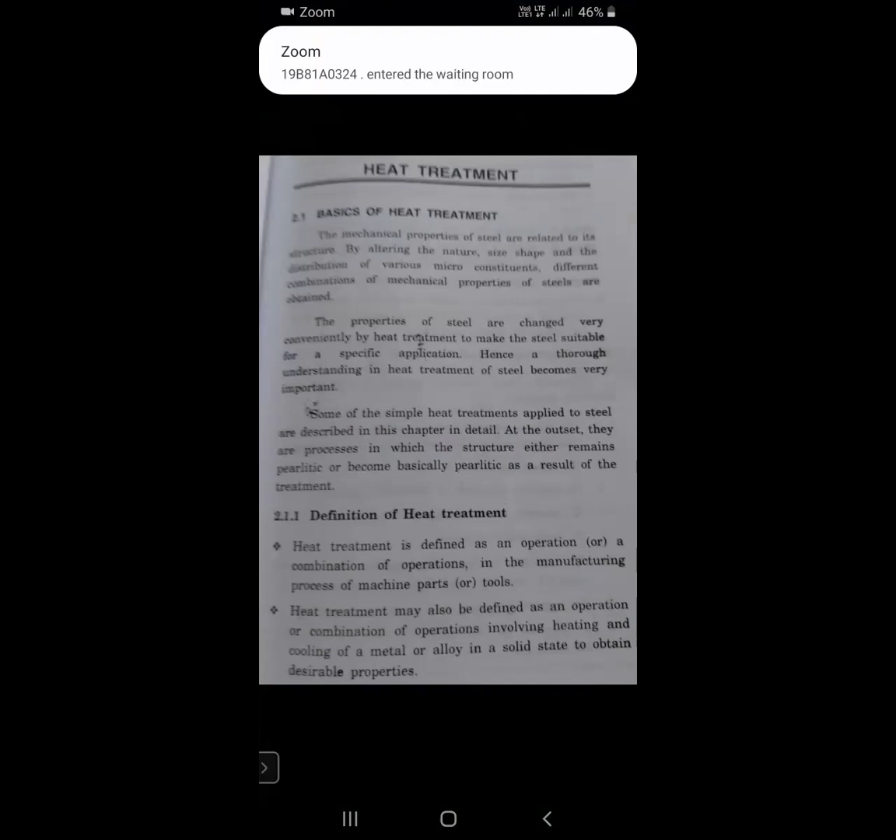Heat treatment. The basics of heat treatment. The mechanical properties of steel are related to its structure. By altering the nature, size, shape, and distribution of various microconstituents, different combinations of mechanical properties of steels are obtained. The properties of steels are changed very conveniently by heat treatment, to make the steel suitable for a specific application.

This is a very important point. Why do you conduct a heat treatment process? Because the properties of steels are changed by doing heat treatment. Properties of steels are changed very conveniently by heat treatment to make the steel suitable for a specific application.

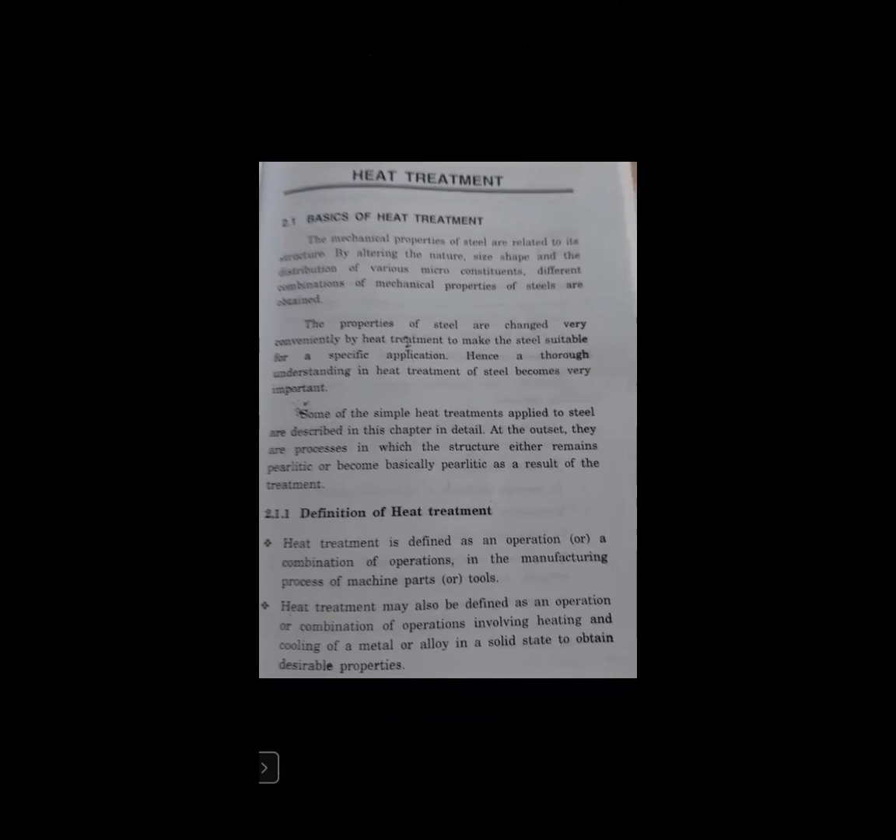As different applications are there, we use different steels. Heat treatment process is very important, particularly for steels, to change the properties for a particular application, a specific application. Hence, understanding heat treatment of steel becomes very important. Some of the simple heat treatments applied to steel are described in this chapter.

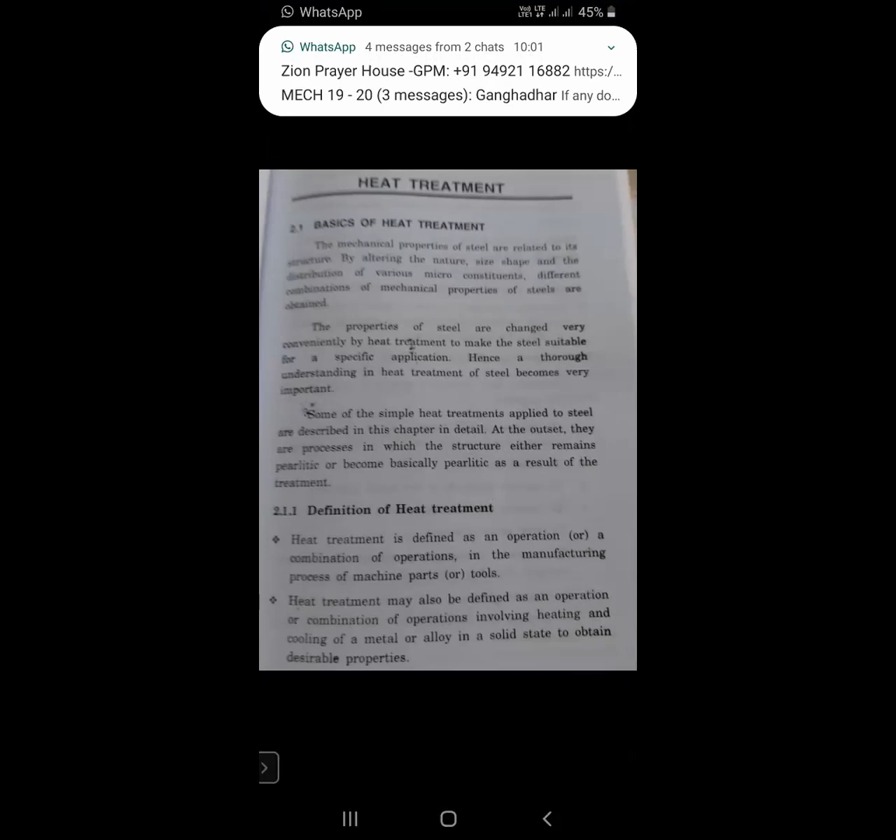Here is the definition of heat treatment. Let us discuss. Heat treatment is defined as an operation or a combination of operations in the manufacturing process of machine parts or tools.

Another definition: heat treatment may also be defined as an operation or combination of operations involving heating and cooling of a metal or alloy in a solid state to obtain desirable properties. By doing the heat treatment process, we change the properties for our specific application. That is the main heat treatment process.

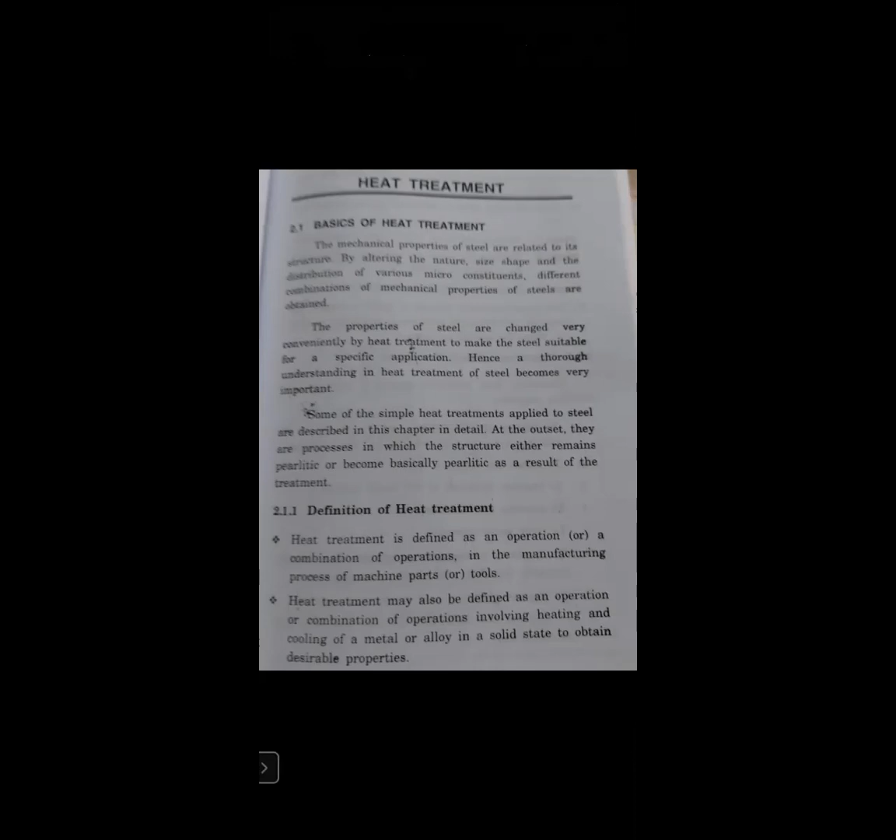Are you able to understand? Heat treatment may be defined as an operation, or a combination of operations, involving heating and cooling of a metal or an alloy in a solid state, to obtain desirable properties.

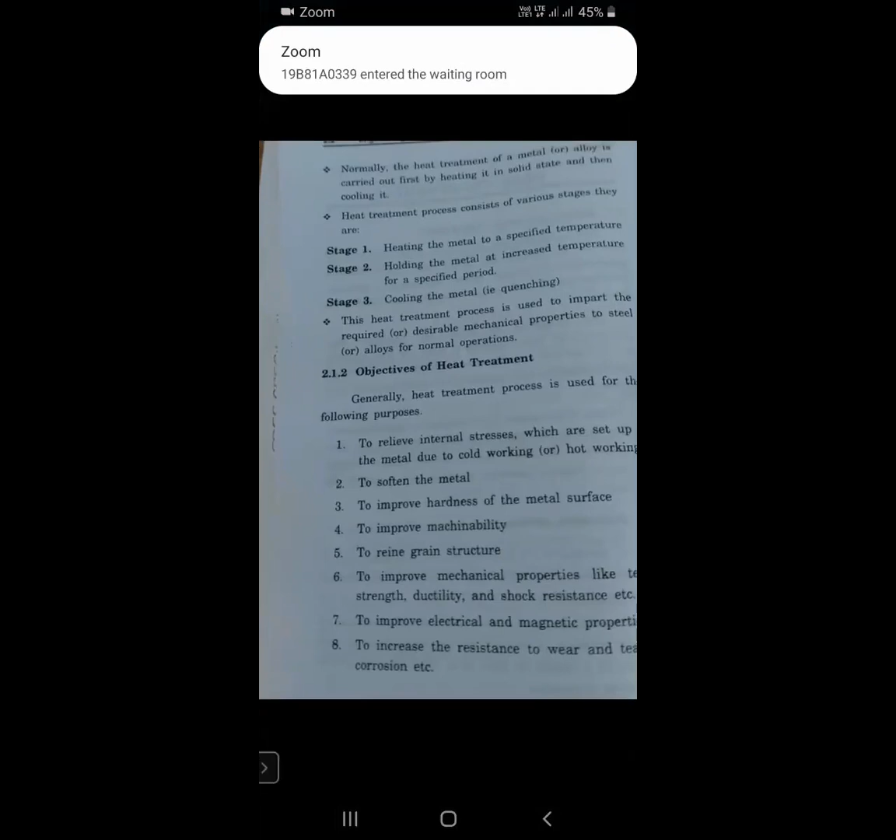This is the heat treatment process. Next is the purpose of heat treatment. See the heat treatment stages. In heat treatment, particularly three stages are there. A heat treatment process consists of various stages.

Suppose you take any steel bar or steel rod, any material that is steel - we are discussing heat treatment of steels only now. The first step in heat treatment is heating the metal to a specific temperature. We have to do this first.

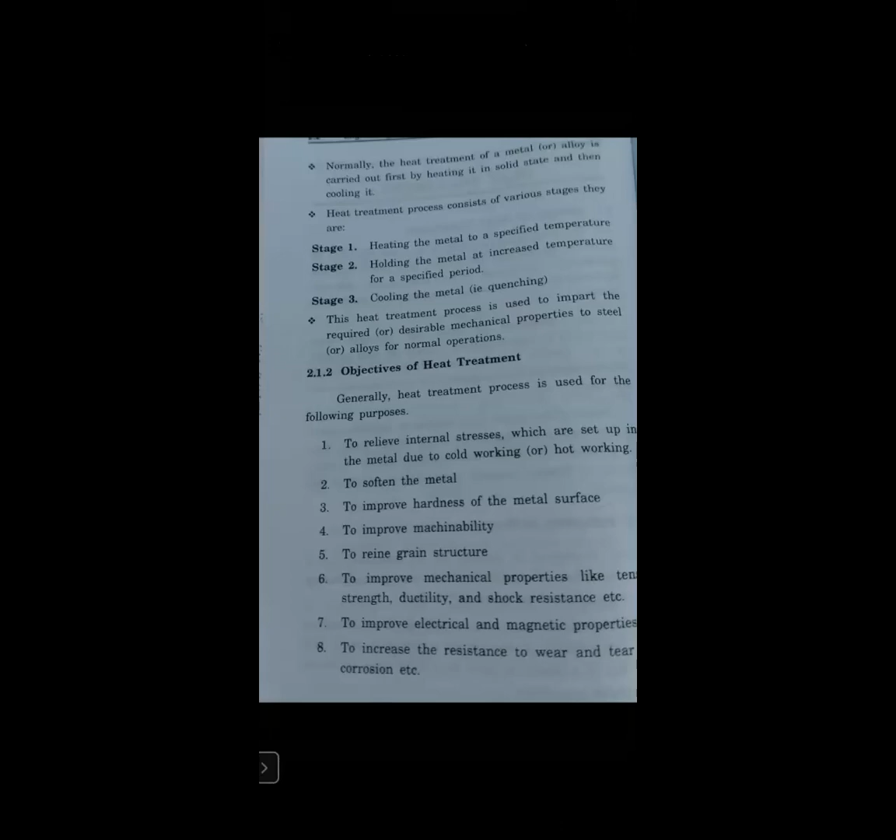That is the first step in heat treatment. Next one is soaking. Soaking means holding the metal at the increased temperature for a specified period of time. Then what do you do after heating? Don't do cooling immediately. We just have to place the material at that temperature for a specified period.

Different processes have different specified times. We have to keep the material at the temperature for some time, for quite some time. Next, the third step is cooling the metal. Just after soaking, the next step is cooling the material.

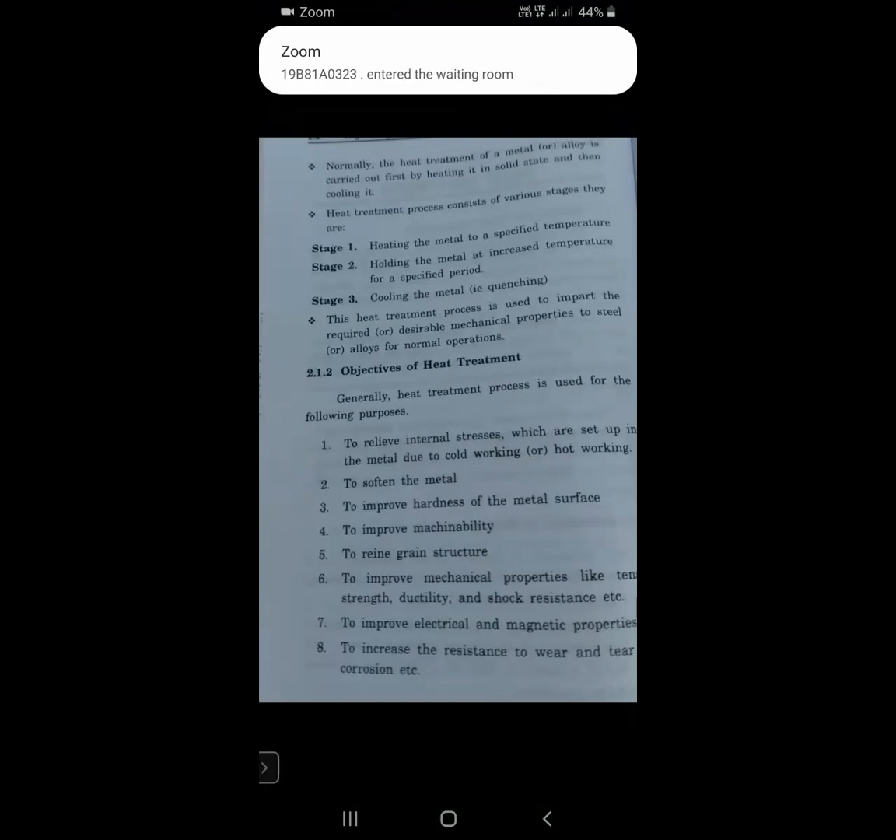Hey, 65. Who is 65? Hello. Hey, this is not good practice. Mute your cell phones, please.

The third step is cooling. The heat treatment process is used to impart the required or desirable mechanical properties to steel alloys for normal operations. Next, what are the main properties or objectives of the heat treatment process - that is, the objectives.

Is it visible? Hello. Yes, sir.

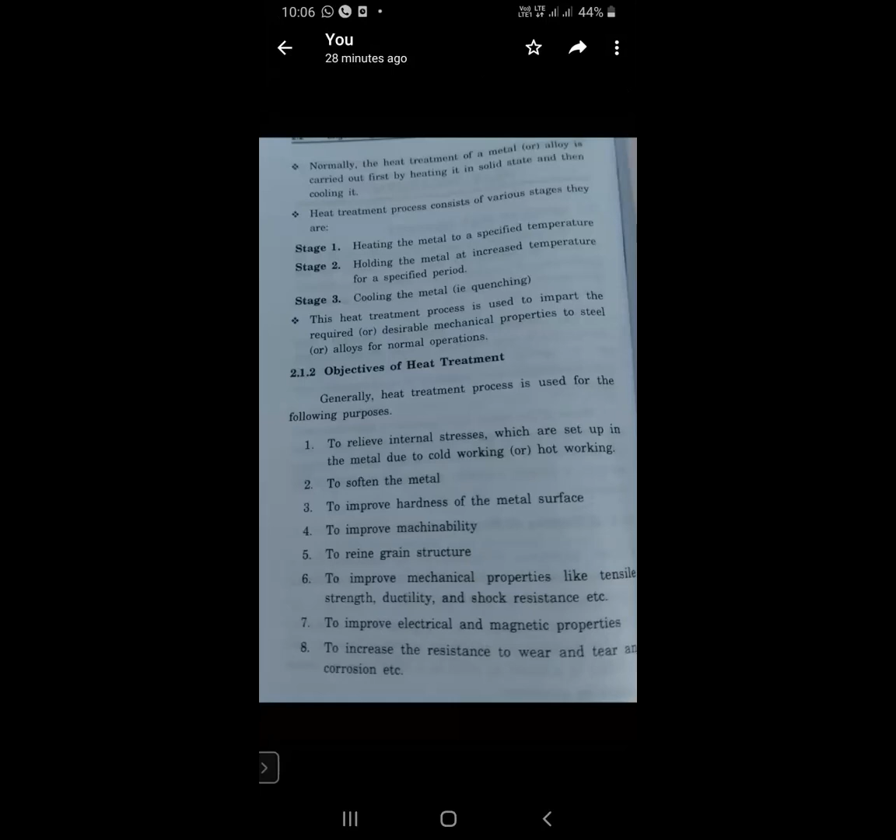What are the objectives of heat treatment? First is to relieve internal stresses, which are set up in the metal due to cold working or hot working, particularly in steels. After processing there are some internal stresses developed by cold working and hot working. First of all, we have to relieve the internal stresses by the heat treatment process.

Second objective is to soften the material. Materials have different properties, and a few materials are very hard. By doing heat treatment, we soften the metal layer or material.

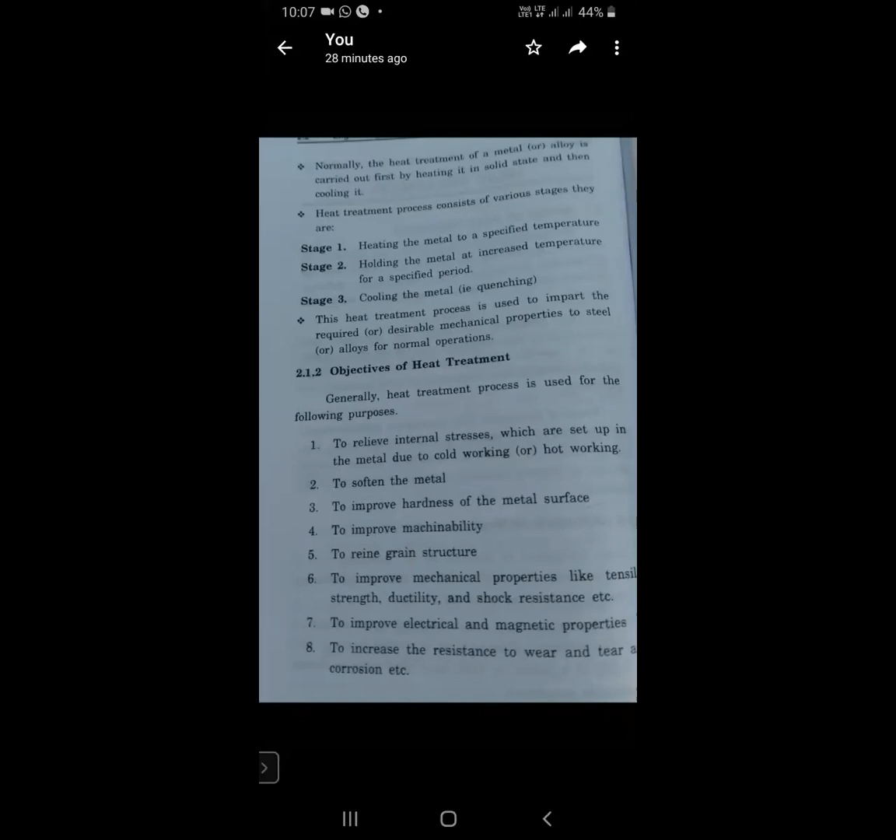Third objective is to improve the hardness of a metal surface. To improve hardness, as all of you know, is a mechanical property. The material must have hardness, otherwise it will be easily broken. That's why we improve the hardness of the metal surface.

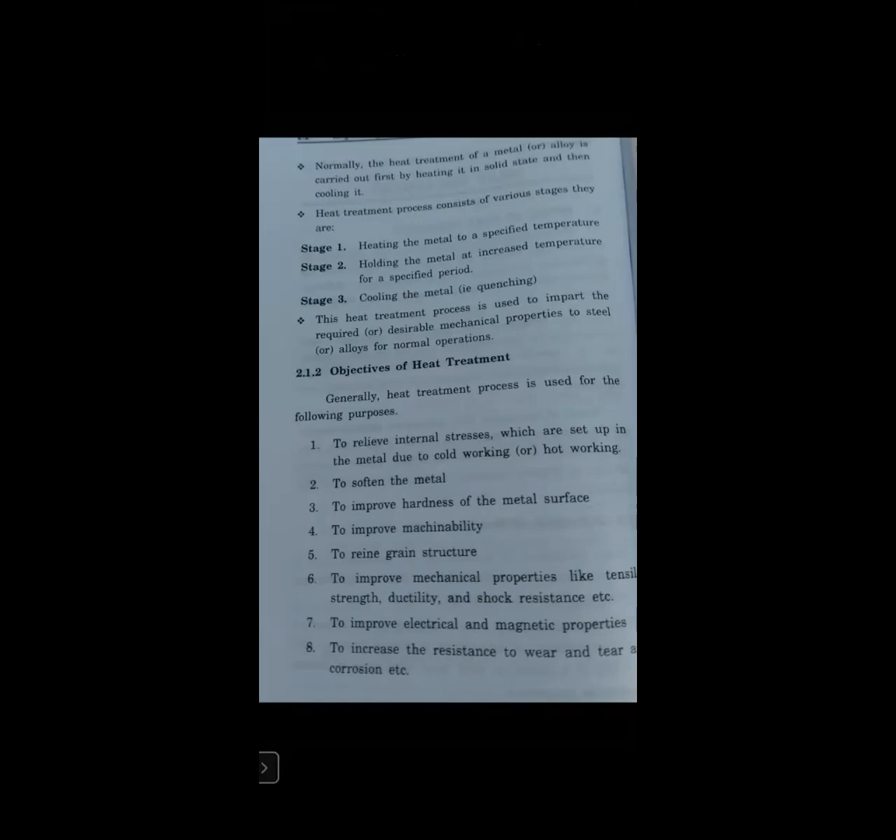Next objective is to improve the machinability. What is machinability? Suppose you want to convert steel into any product or shape, then we have to apply machining operations. That's why we improve machinability, particularly by doing a heat treatment process.

Another important objective is to refine the grain size. Different grains are there, as I already discussed in the first unit - coarse grains and fine grains. By doing heat treatment, we refine and change the grain structure. That is another objective.

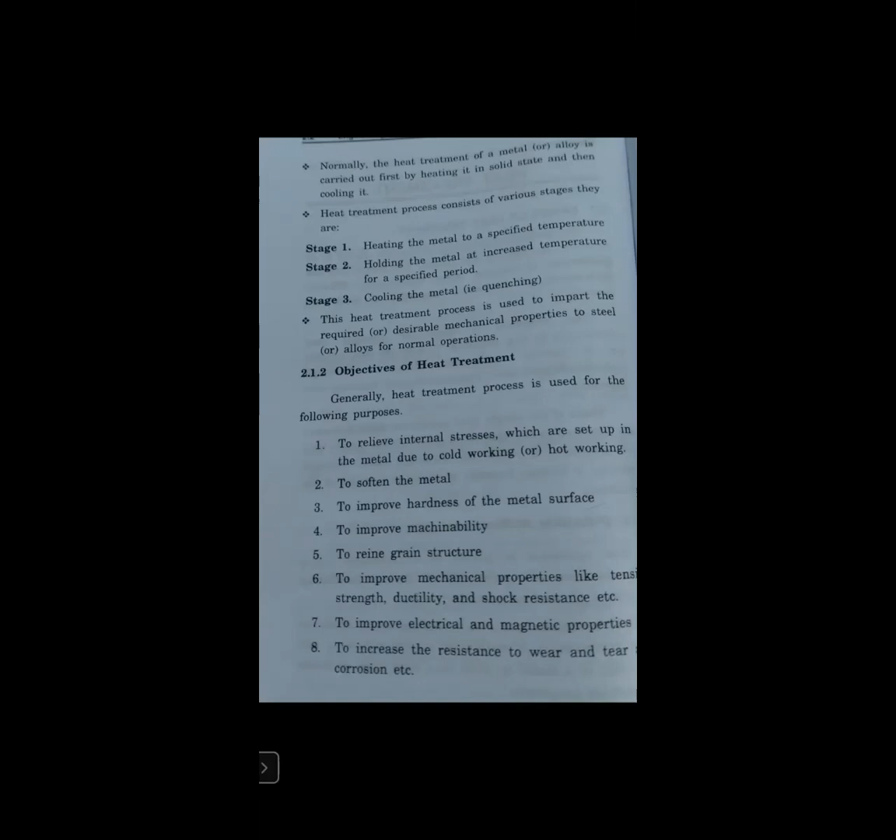Sixth objective is to improve the mechanical properties like tensile strength, ductility, and shock resistance. These are very important mechanical properties, as discussed in strength of materials - tensile strength, ductility, and shock resistance can all be improved.

Next is to improve the electrical and magnetic properties, which are also very important for steel alloys. Electrical and magnetic properties can be improved by doing heat treatment process.

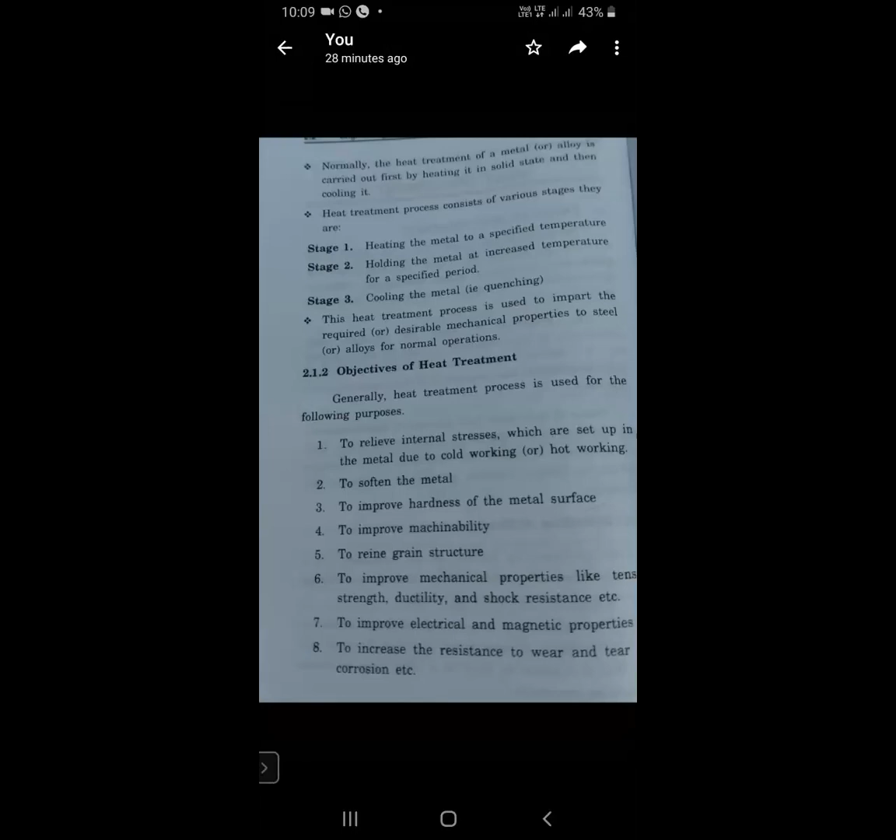Next is to increase the resistance to wear and tear and corrosion. This is very important - materials undergo wear and tear and corrosion. By doing this heat treatment process, we increase the resistance to wear and tear and corrosion. These are very important objectives.

These are very important objectives. So first, what have we covered: first is what is heat treatment, second is the stages of heat treatment, third is the objectives of heat treatment.

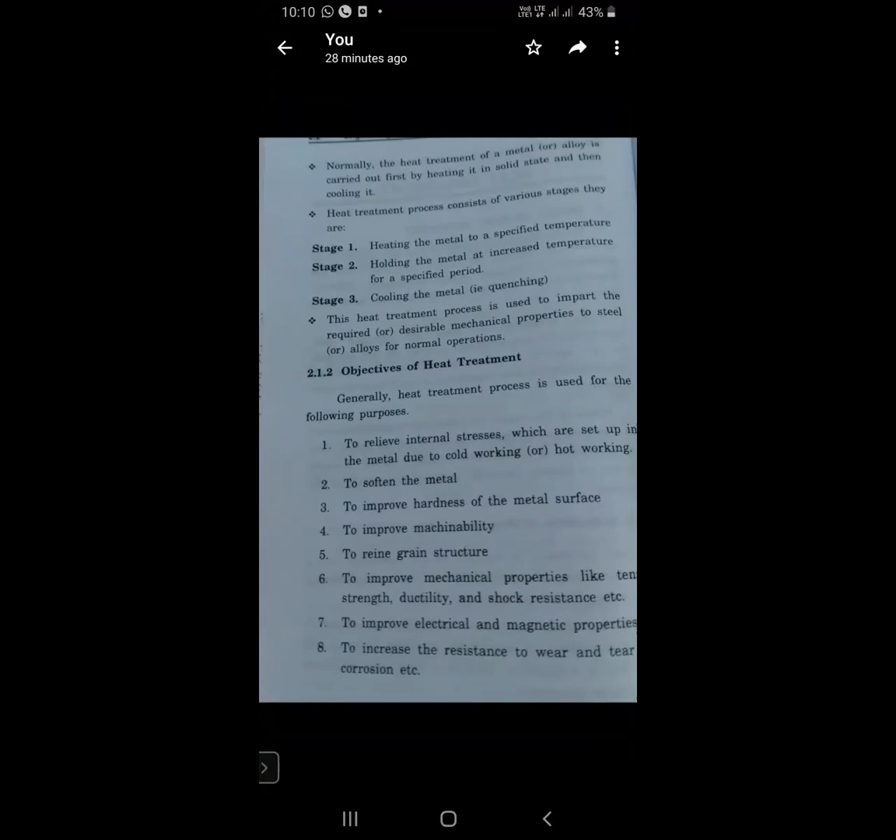Hello, hello, Babu. Yes, sir. Yes, sir. Okay, now what have you discussed so far?

First is the definition of heat treatment. Second is the stages of heat treatment. Third is the objectives of heat treatment. Next is the types of heat treatment processes.

You may ask, sir, you are telling heat treatment objectives, properties and definitions - sir, what are the types of heat treatment process? Yes, so many types of heat treatment processes are there. The important ones - first is the annealing process.

Annealing process is very, very important. Next is normalizing. So all of you understand: first is annealing, second is normalizing, third is hardening, fourth is tempering.

The fifth and sixth are austempering and martempering, but we will not discuss those in our syllabus, only up to four. Next, the seventh is case hardening.

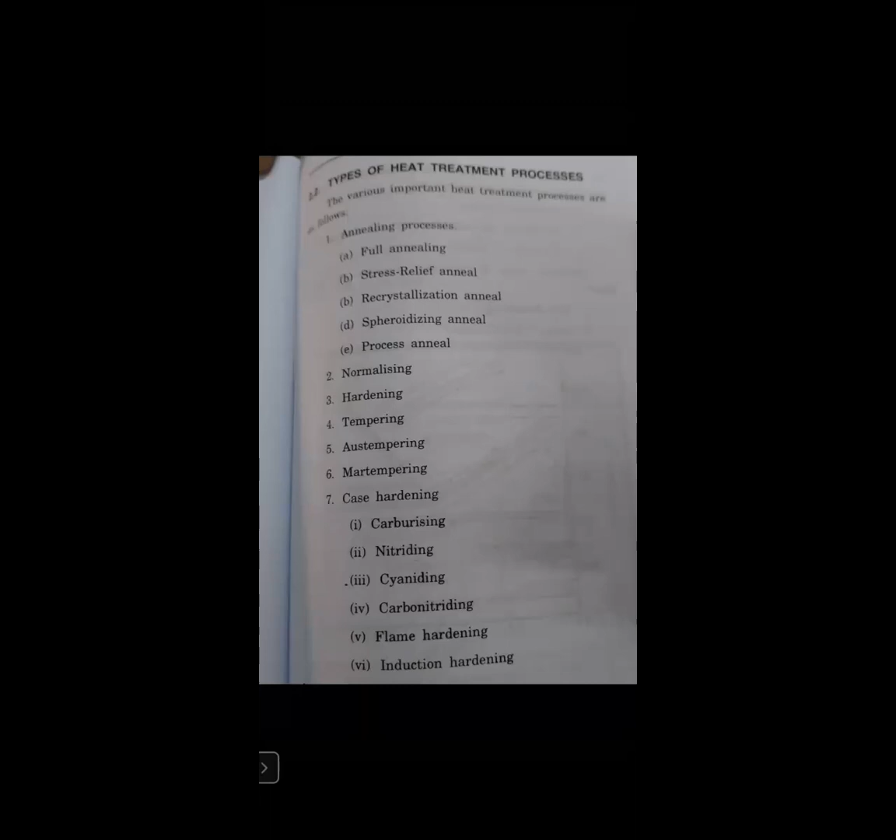Particularly for annealing, we can classify it into five types: first is full annealing, second is stress relief annealing, next is recrystallization annealing, fourth is spheroidizing annealing, and fifth is process annealing. So the annealing process can be classified into these five different types.

Now that covers the heat treatment processes. Let us discuss them one by one, and all of you try to understand each process.

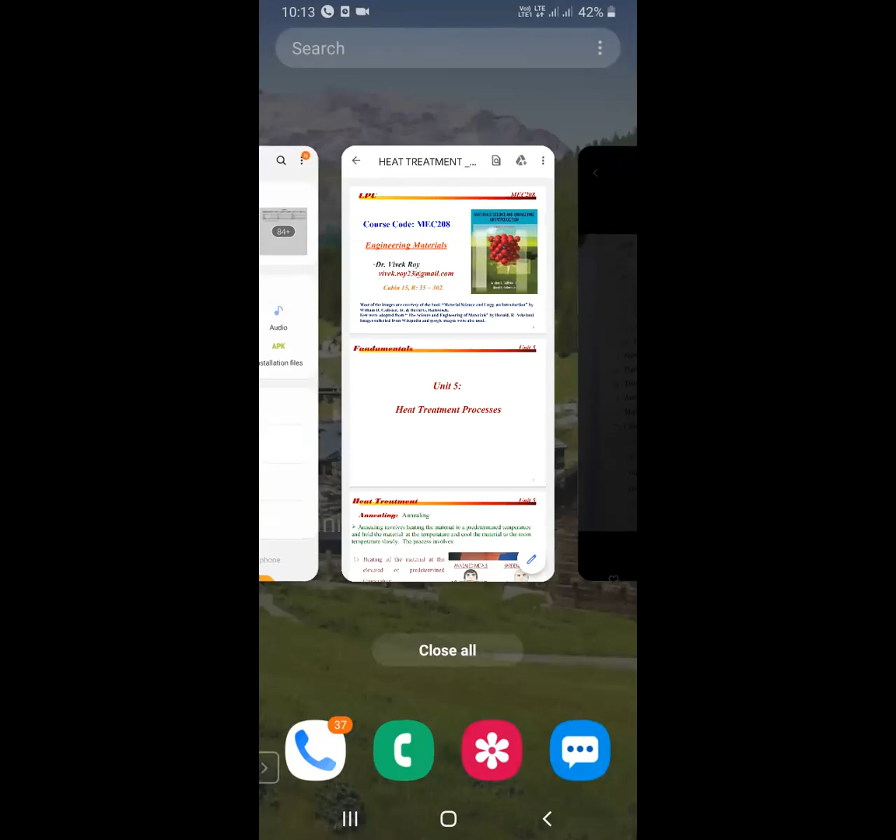See, first one is which process? First, annealing, one sir. Yes, annealing. What is annealing?

Okay, let us discuss annealing. Annealing involves, same as heat treatment definition, heating the material to a predetermined temperature. First we have to heat it, at one temperature that is predetermined. That means we will determine the temperature for the process.

Now suppose the annealing process having some definite temperature, and holding the material at that temperature. Second stage is holding the material at that temperature, and cool the material to room temperature slowly. Yes, this is the meaning of annealing. Okay, all of you understand this one?

Okay first, what will you do? First, annealing involves heating the material to a predetermined temperature. How much the temperature? Then I will show you. Next, second one is hold the material at the temperature for quite some time. Next one is cool the material to room temperature slowly.

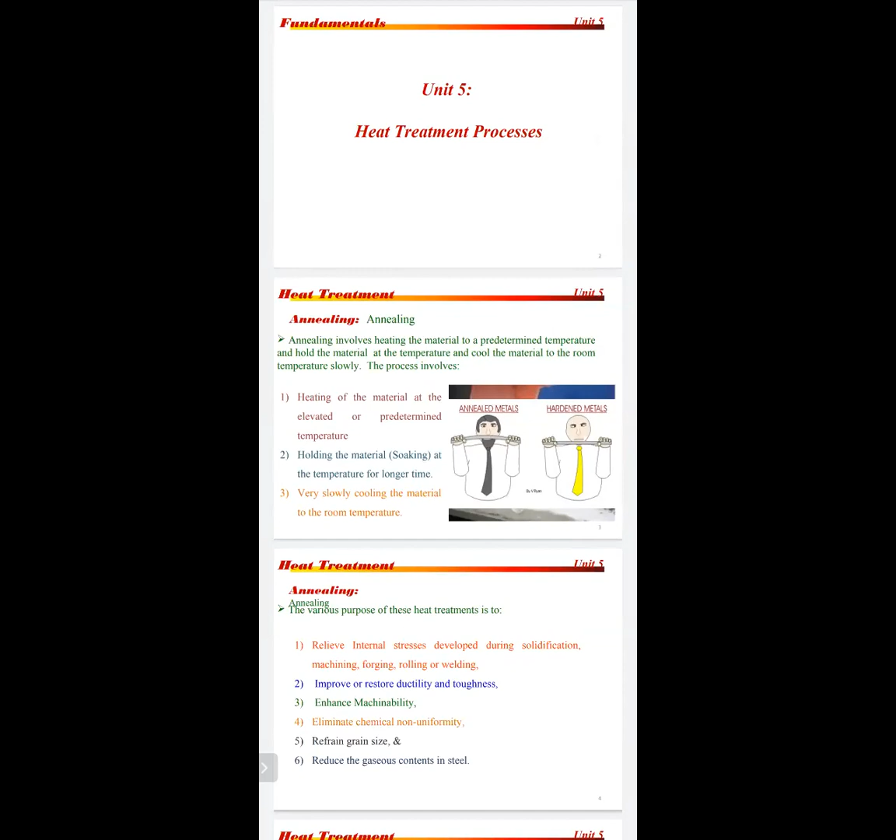Next one is the process involves here. See, three steps above I explained. First one is heating the material at that elevated or predetermined temperature. Next one is holding the material, meaning soaking at the temperature for a longer time. Next, third one is very slow cooling the material to room temperature.

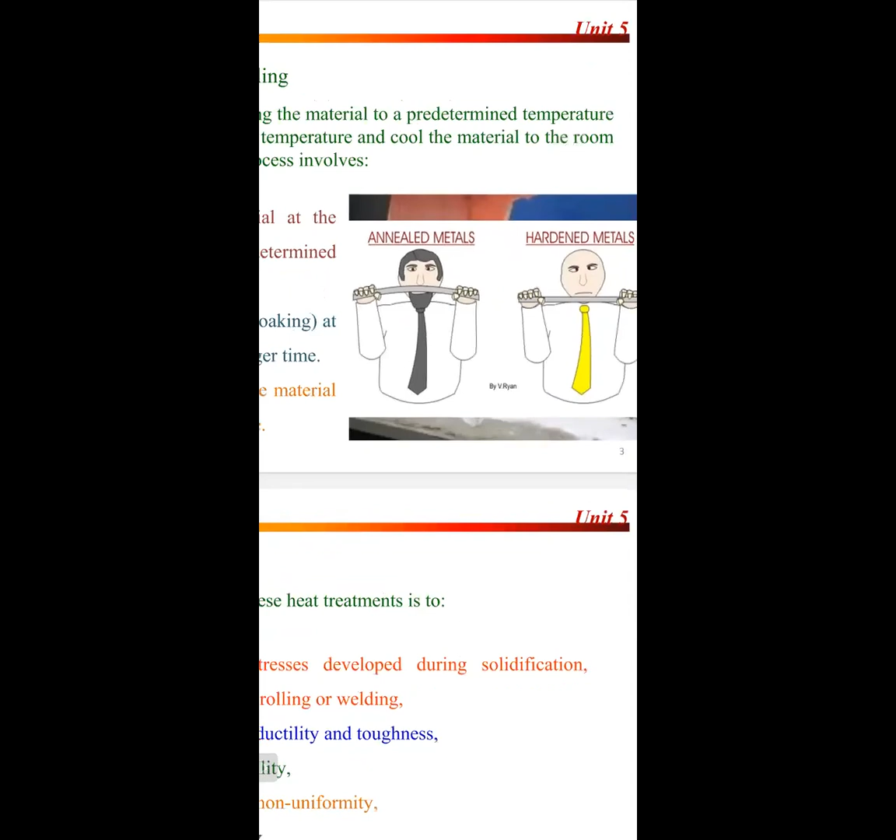See here, annealed metals and hardened metals, two persons, hold the two rods. First one is the annealed material, we can see it bends to any shape. Hardened material is very difficult. Now see, annealed materials have the property of ductility. Okay, all of you understand this one?

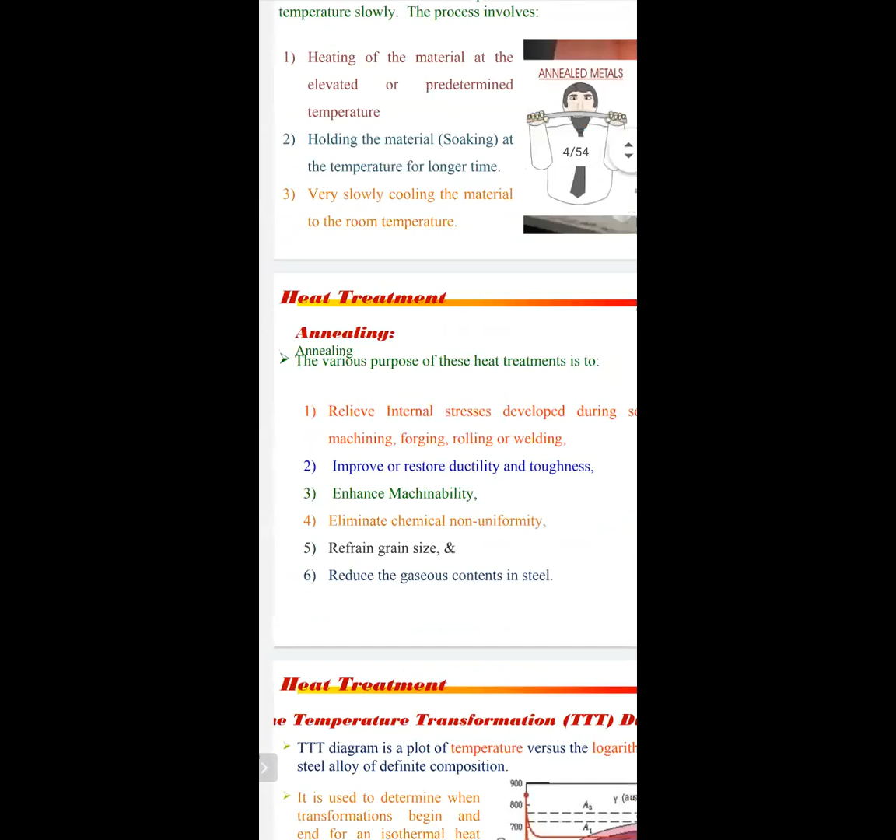Okay, now see here, the purpose of the annealing process. Already we have discussed that it is to relieve the internal stresses developed during solidification. Obviously during solidification, definitely there will be some internal stresses developed. Now how can you relieve that internal stress? That is by doing the annealing process, that means heat treatment process.

Okay, here machining, forging, rolling or welding, those are the processes there. Next, second one is to improve or restore ductility and toughness. Yes, this is very important. All of you understand what property you have to improve here, that is the ductility, to improve the ductility and the toughness.

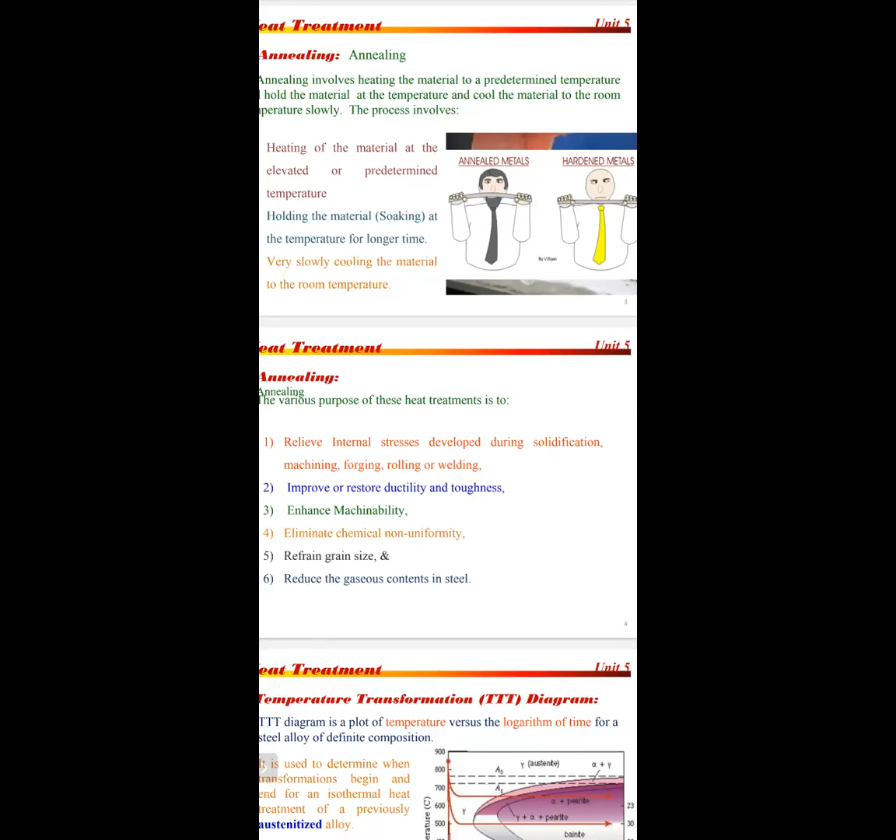Ductility means, already discussed in the previous class, that we can convert the material into wires. That is the ductility property. Or toughness means the ability to resist shock loads. That is toughness.

See here, third property is enhanced machinability. I hope you may know the machinability property. Machinability means the ability to do the machining process. Now that is also improved in this annealing process.

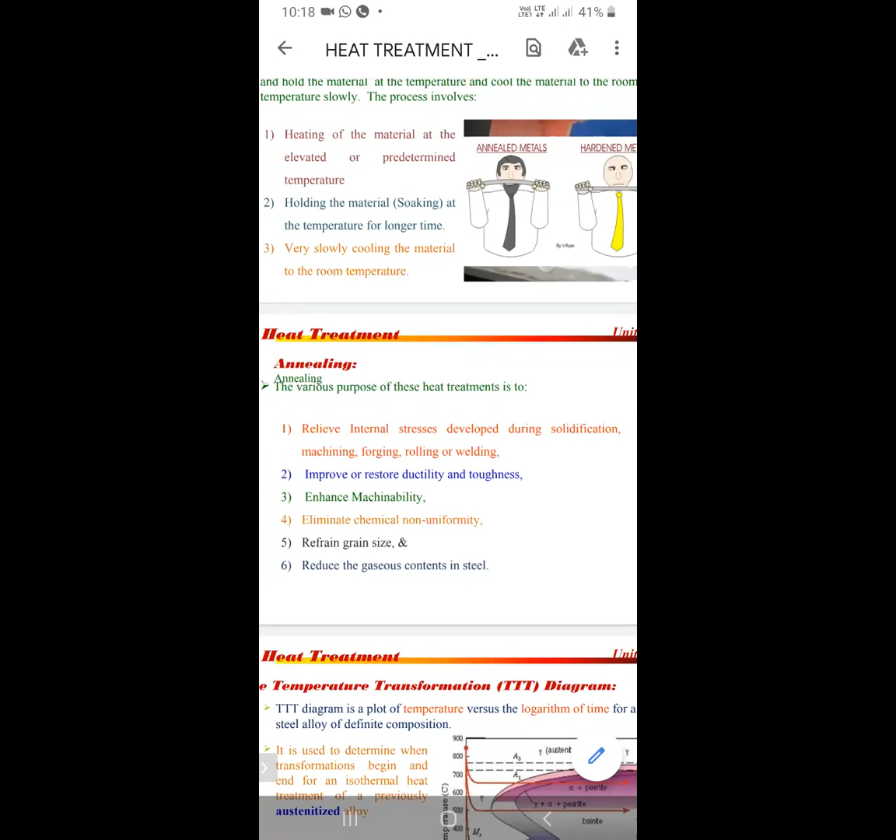Enhanced machinability. Next one is eliminate chemical non-uniformity. There is some non-uniformity during the solidification process, that can also be eliminated. Here, fifth one is refine the grain size. Refine, that is to change the grain structure. Now that is for steels, to improve the refined, that means to change the grain size.

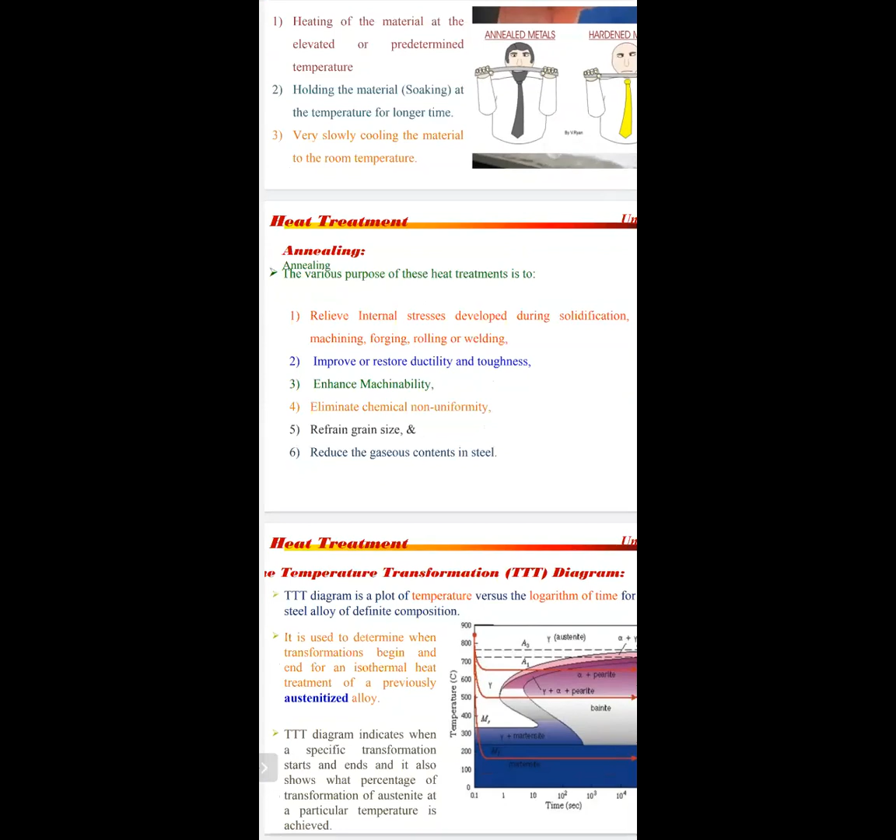Next, sixth one is reduce the gaseous contents in steel. That is the purpose of annealing, annealing process purpose. Okay, I hope all of you understood the annealing process purpose.

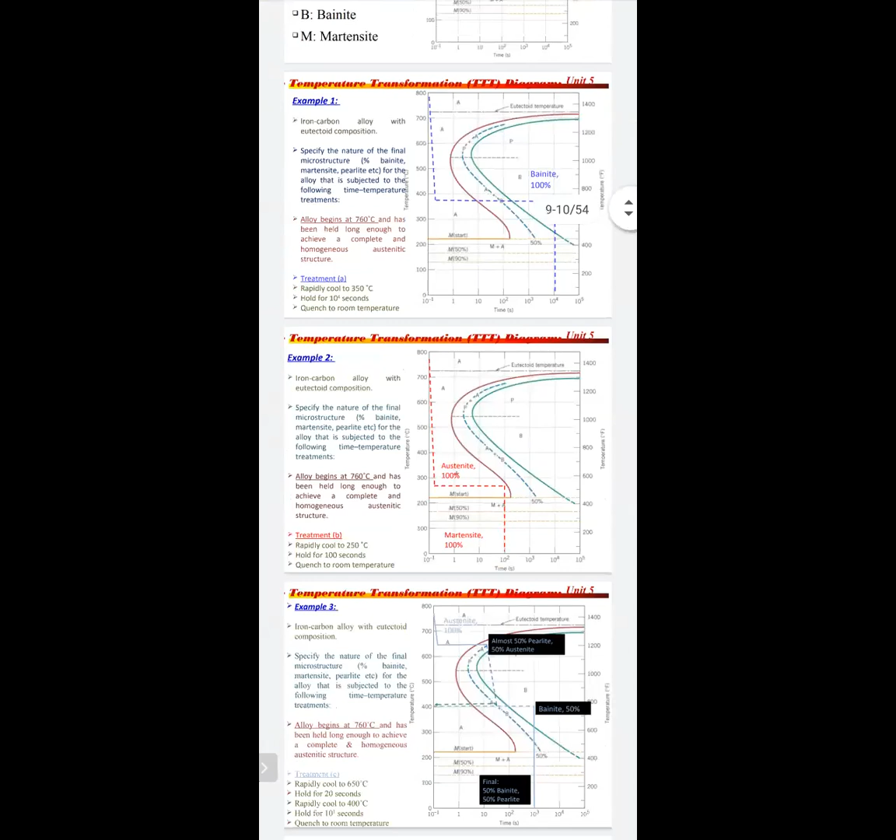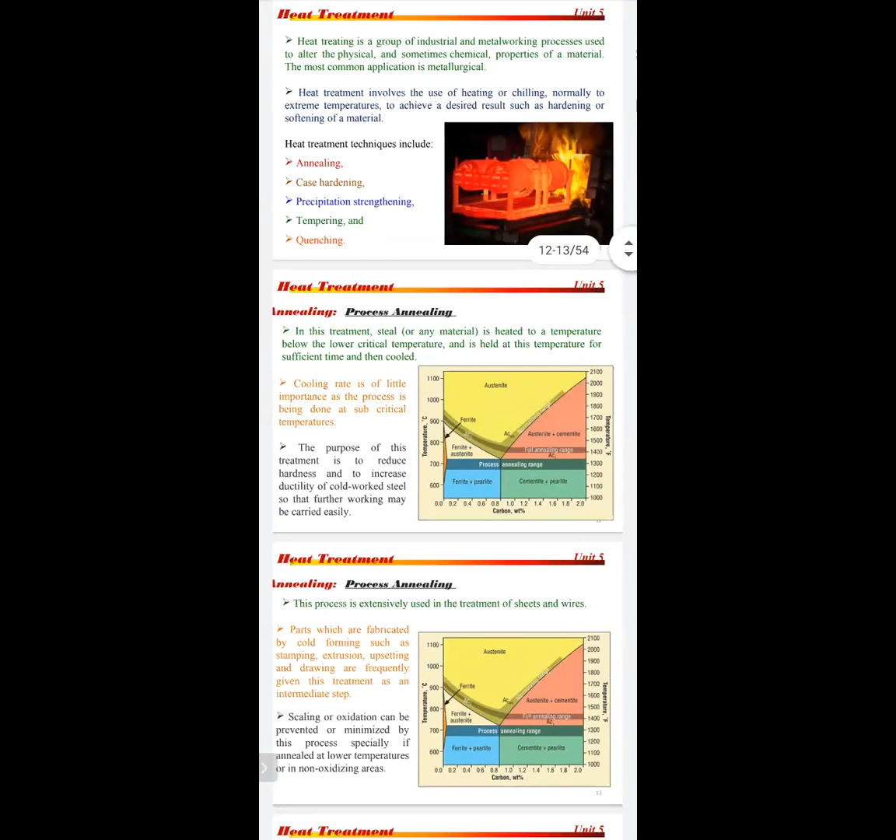Okay, see here, types of annealing process already I have shown you. See here, I hope you are seeing one figure. Okay, what is there?

Heat treatment, sir. See here one furnace. I hope you are seeing one furnace. Yes, sir. Material is heating in that furnace. Okay? Some red hot temperature is seen. Each and every material has a predetermined temperature to heat it, in annealing, normalizing, any process.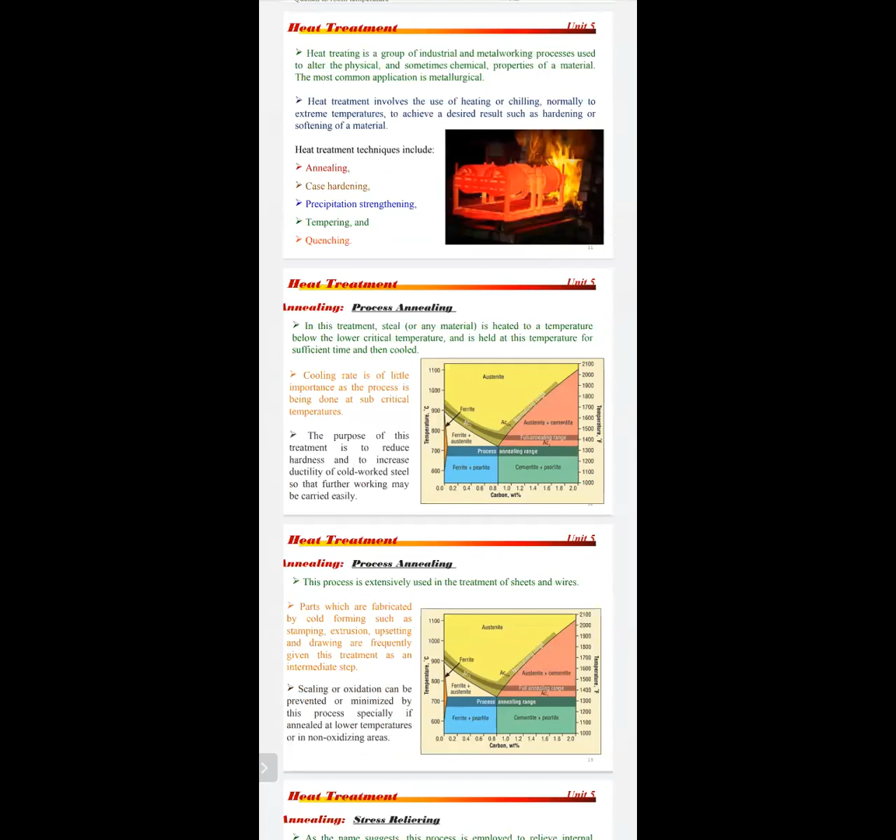Now see here, heat treatment process, again the definition. Heat treatment is a group of industrial and metalworking processes used to alter the physical and sometimes chemical properties of a material. The most common application is metallurgical. Heat treatment involves the use of heating or chilling, normally to extreme temperature, to achieve a desired result such as hardening or softening.

First one is hardening and softening. We can do these two in the heat treatment process. If you want to harden the material, you can go for the heat treatment process. If you want to soften the material, you can do the heat treatment processes, to achieve the desired results such as hardening or softening of a material.

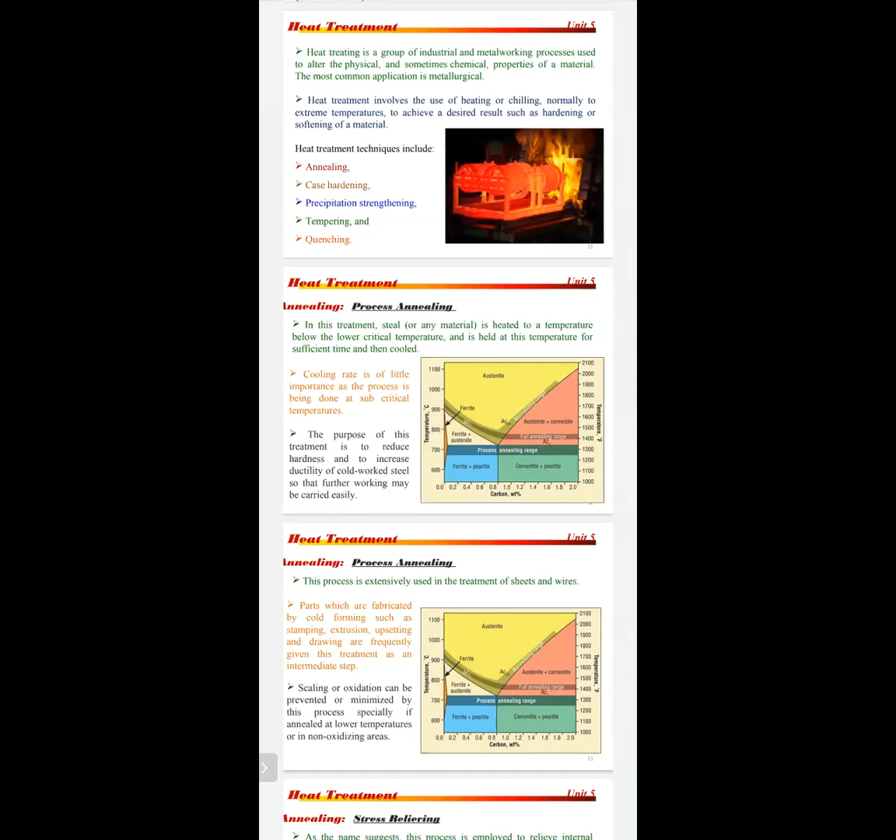Okay? Hello. Okay, sir. Have you understood this concept? Heat treatment is a very interesting concept. Okay, heat treatment. All of you understand this one.

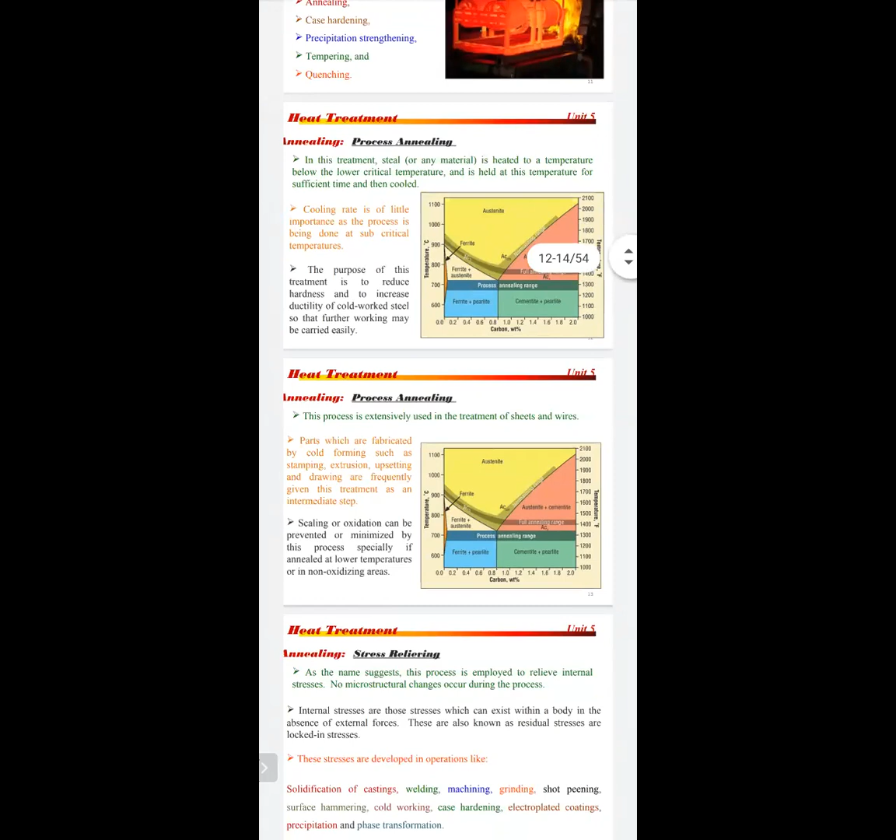Here types, heat treatment types, I already discussed. First one is annealing, that is process annealing. Let us discuss. In this treatment, steel is heated to a temperature below the lower critical temperature, held at that temperature for sufficient time and then cooled down. See, particularly in the iron carbon diagram, all of you understood this one.

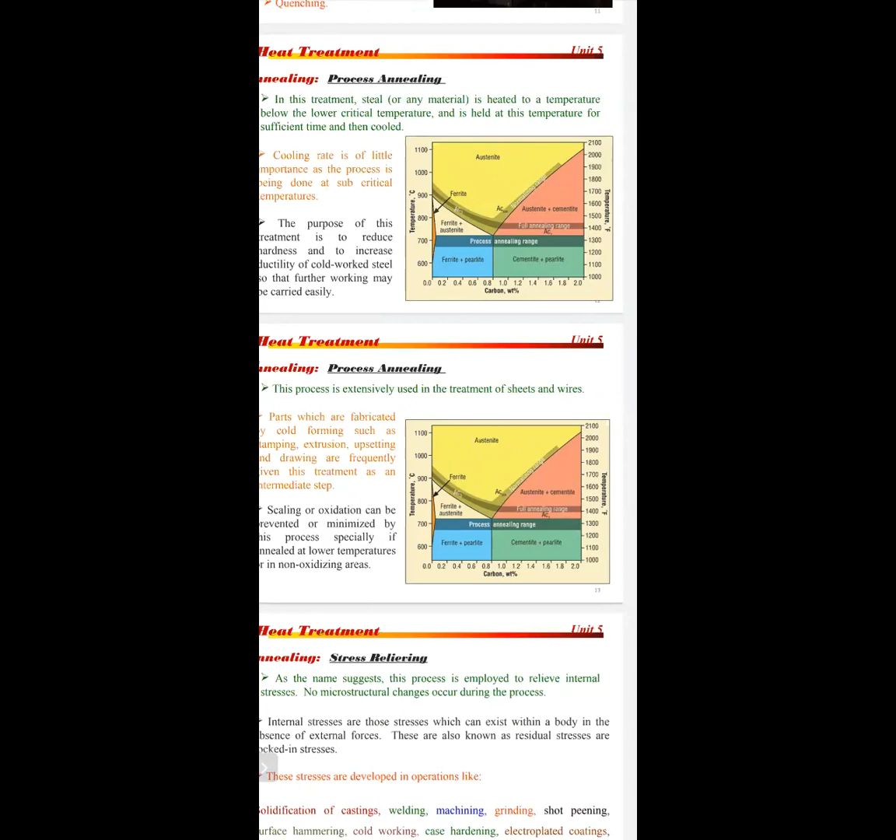Here different temperatures are there. The lower critical temperature is 723. For the upper critical temperature, two curves are there, AC3 and ACM; these are the upper critical. This one is the lower critical, meaning below 723 is the process annealing range. That is the lower critical temperature.

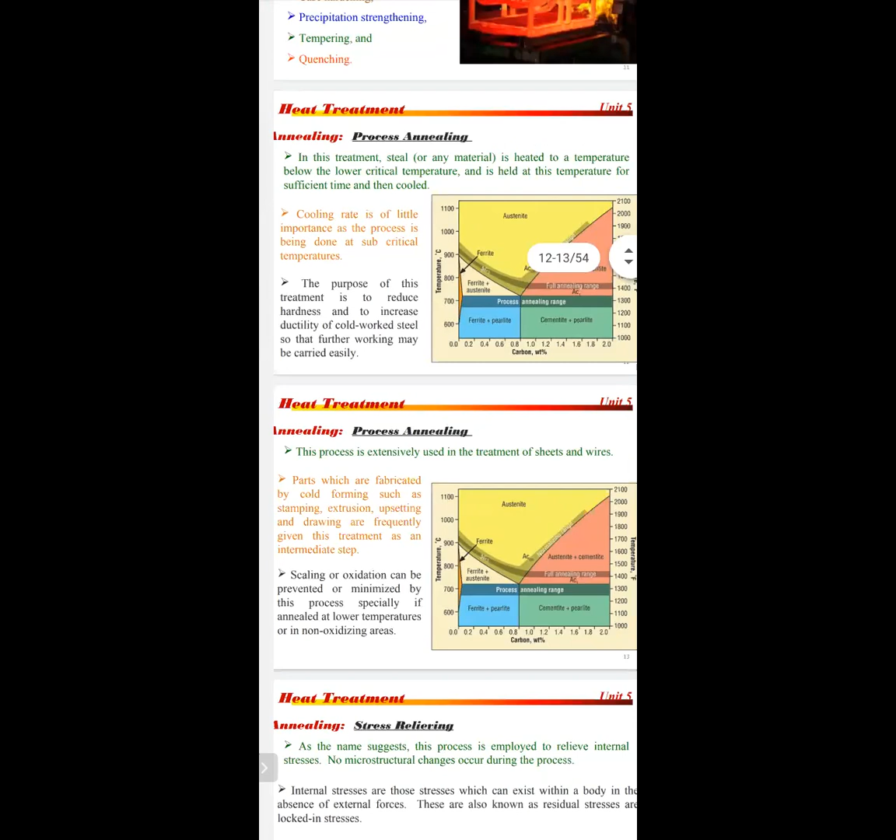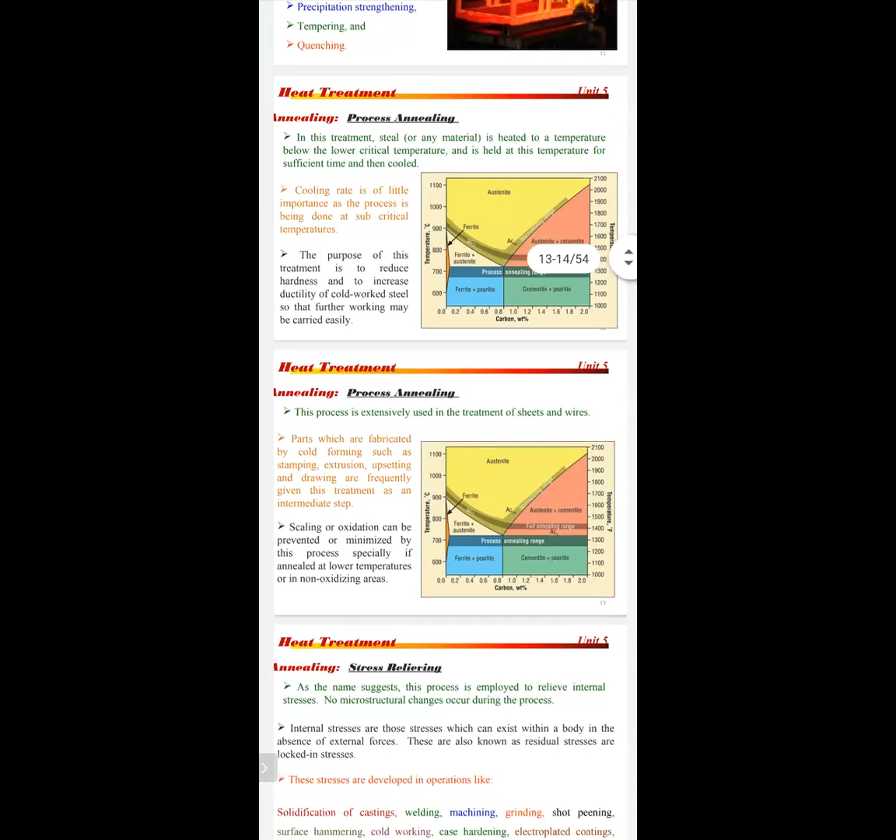Here, annealing process. The steel is heated to a temperature below the lower critical temperature and is held at this temperature for a sufficient time and then cooled down. The cooling rate is of little importance as the process is being done at a subcritical temperature.

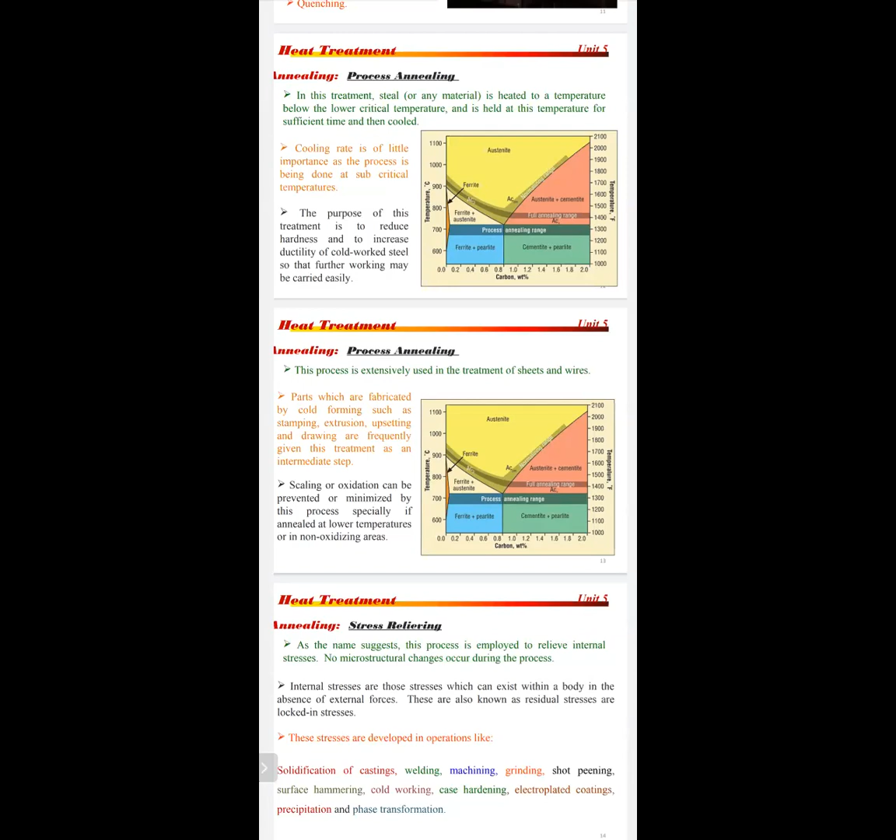The purpose of this treatment is to reduce the hardness and to increase ductility of cold worked steels so that further working may be carried out easily. All of you understand this point. The ductile property will be improved, so that further working may be carried out easily.

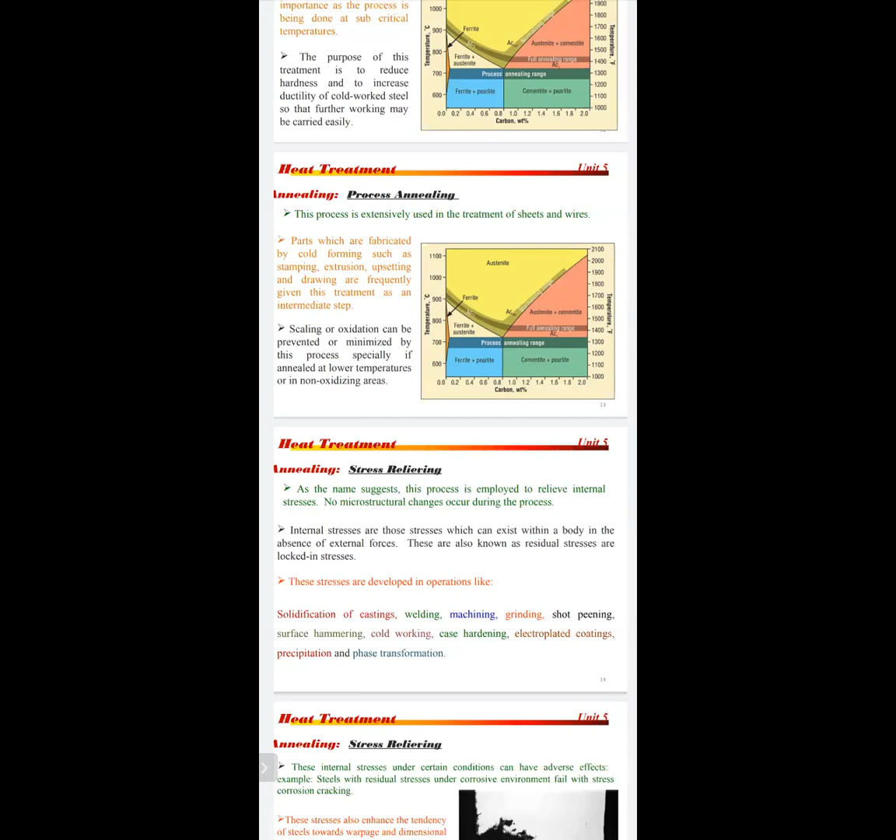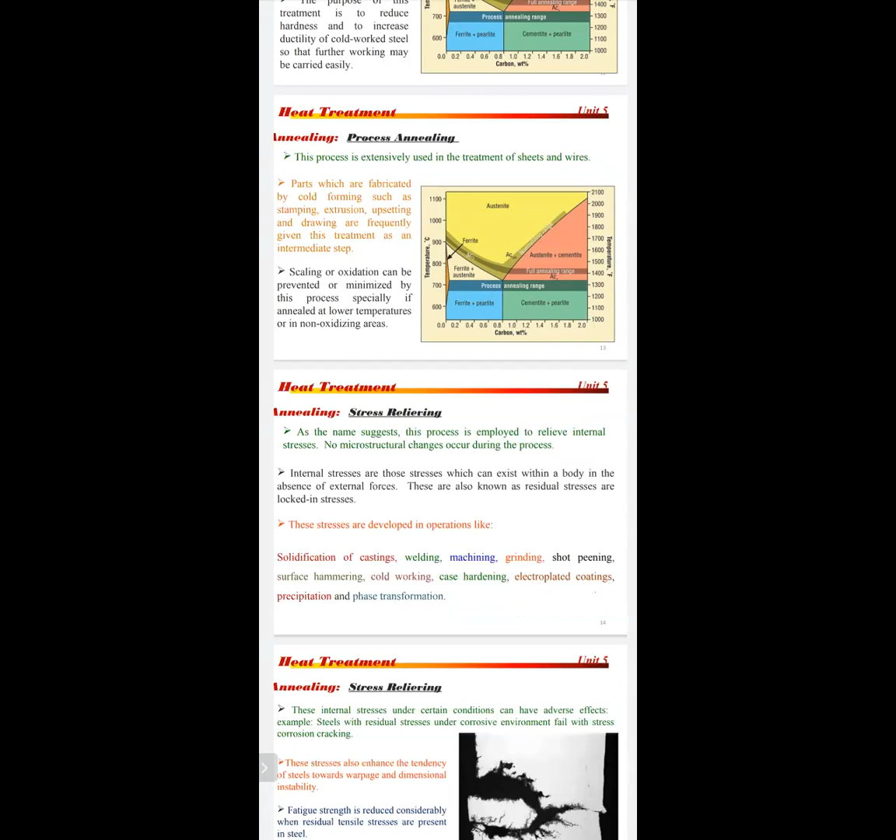If you want to do further processing, parts which are fabricated by cold forming, such as stamping, extrusion, upsetting, drawing, are frequently given this treatment as an intermediate step. Next, scaling or oxidation can be prevented or minimized by this process, specifically when annealed at a lower temperature in non-oxidizing atmospheres.

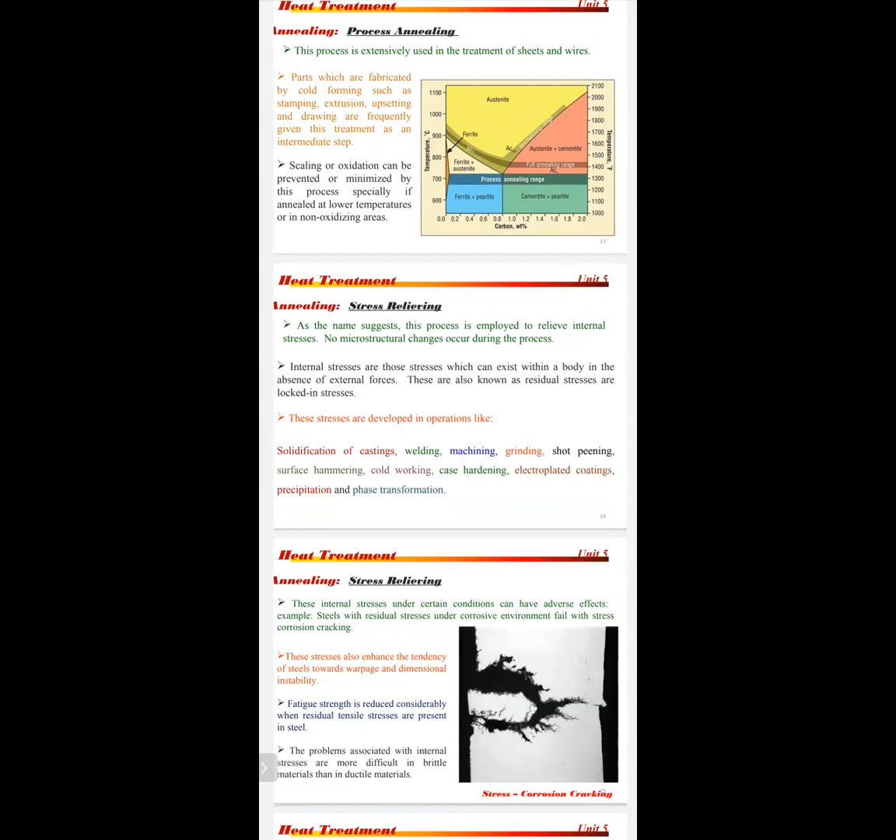That was process annealing. Next type is stress relieving annealing. As the name suggests, this process is employed to relieve the internal stresses. That's why the name is given. No microstructural changes occur during the process.

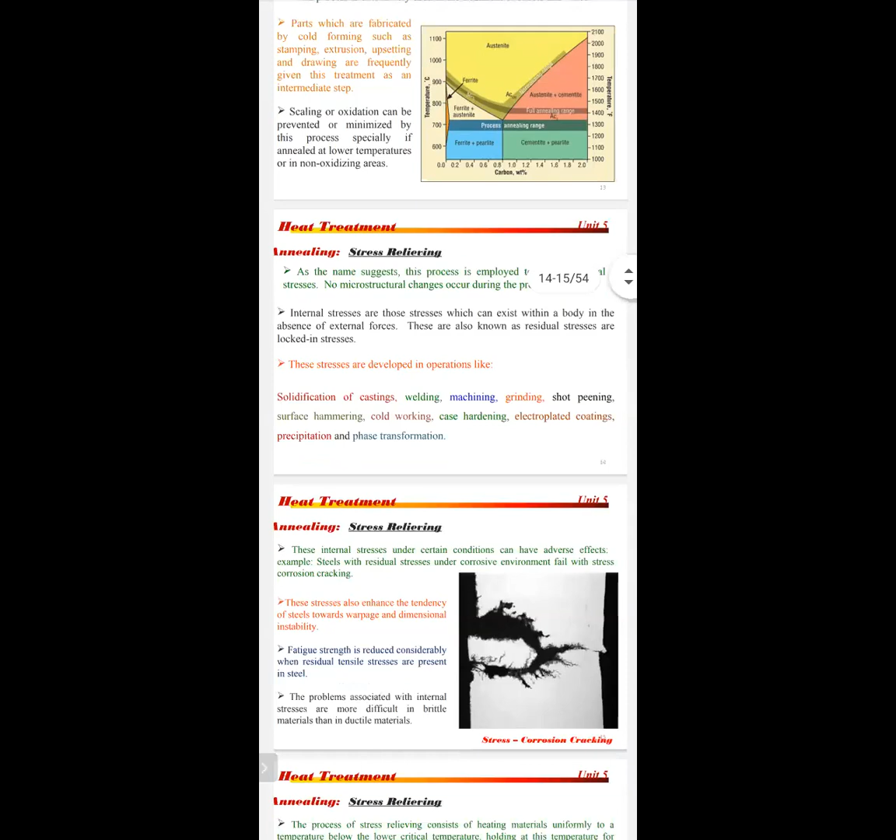Internal stresses are those stresses which can exist within a body in the absence of external forces. These are also known as residual stresses or locked in stresses. How are the internal stresses developed, in what operations? The operations are given below. First one is the solidification of casting,

welding, machining, grinding, shot peening, surface hammering, cold working, case hardening, electroplated coating, precipitation and phase transformation. During these operations, the stresses are locked in the material. That's why stress relieving annealing is used to relieve those stresses.

I hope you are seeing that stress corrosion cracking is also resisted by doing this process. These internal stresses under certain conditions can have adverse effects. Example: steels with residual stresses under corrosive environment fail with stress corrosion cracking. If you do not relieve these internal stresses, it may lead to stress corrosion cracking failure.

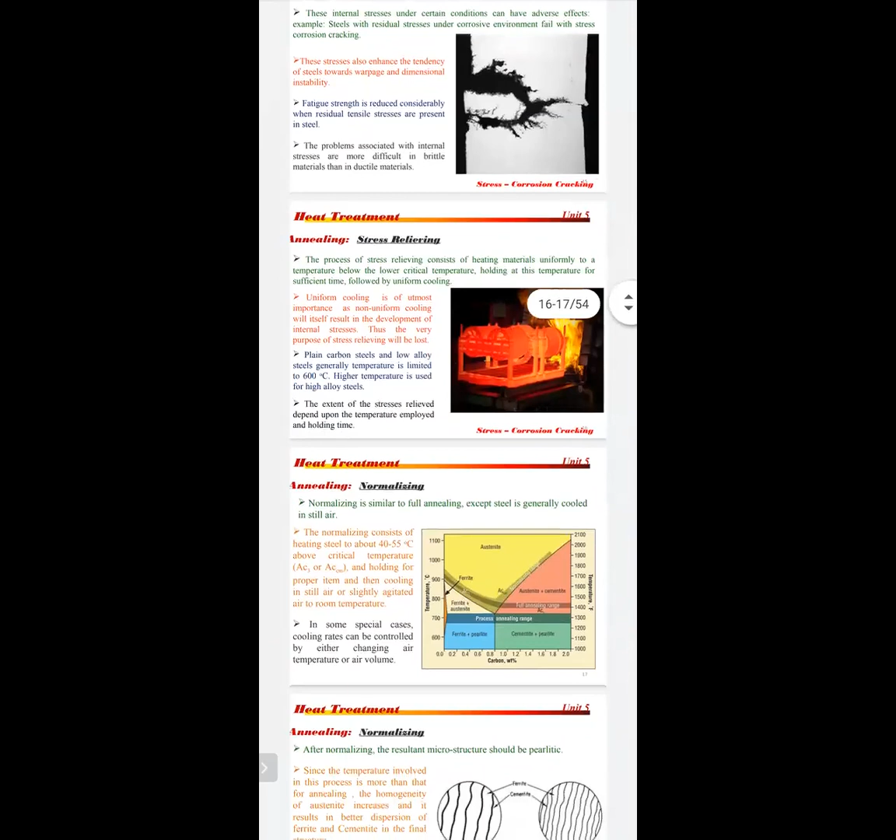Internal stresses, actually, relieving these internal stresses is more difficult in brittle material than in ductile material. Next point: the process of stress relieving consists of heating the material uniformly to a temperature below the lower critical temperature, holding at this temperature for sufficient time, followed by uniform cooling.

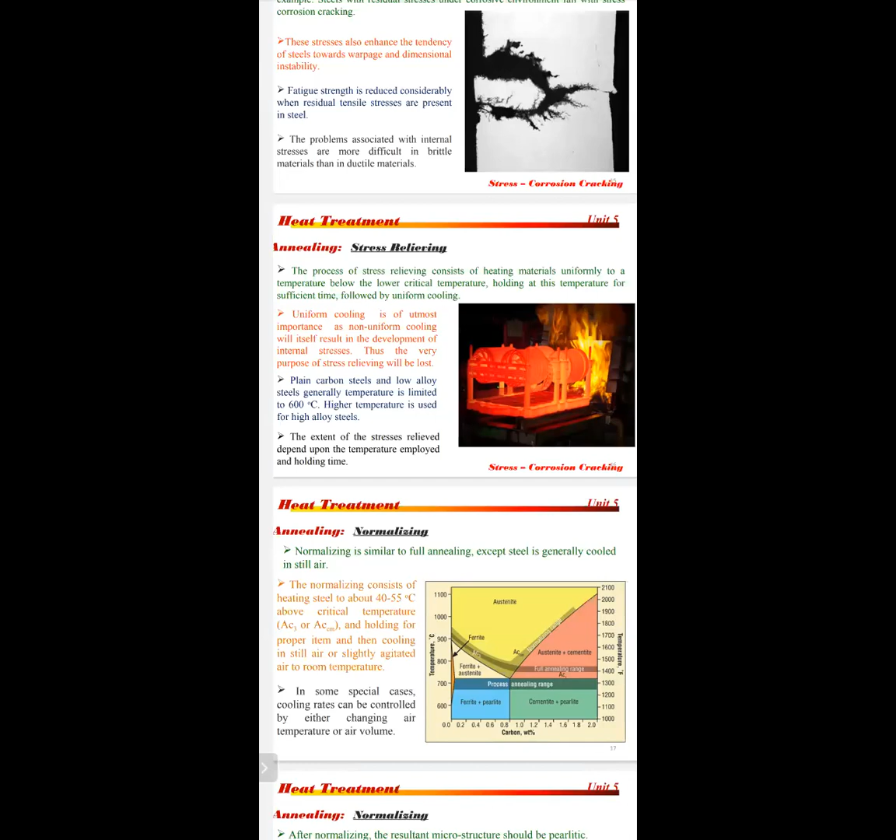In this heat treatment process, as I'm repeatedly telling you, the first step is heating the material uniformly to a temperature below the lower critical temperature. Holding at this temperature for a sufficient time, followed by uniform cooling. Uniform cooling is very, very important.

Uniform cooling is of utmost importance, as non-uniform cooling will itself result in the development of internal stresses. Thus, the very purpose of stress relieving will be lost. That's why uniform cooling is very important. Otherwise, there will definitely be the development of internal stresses.

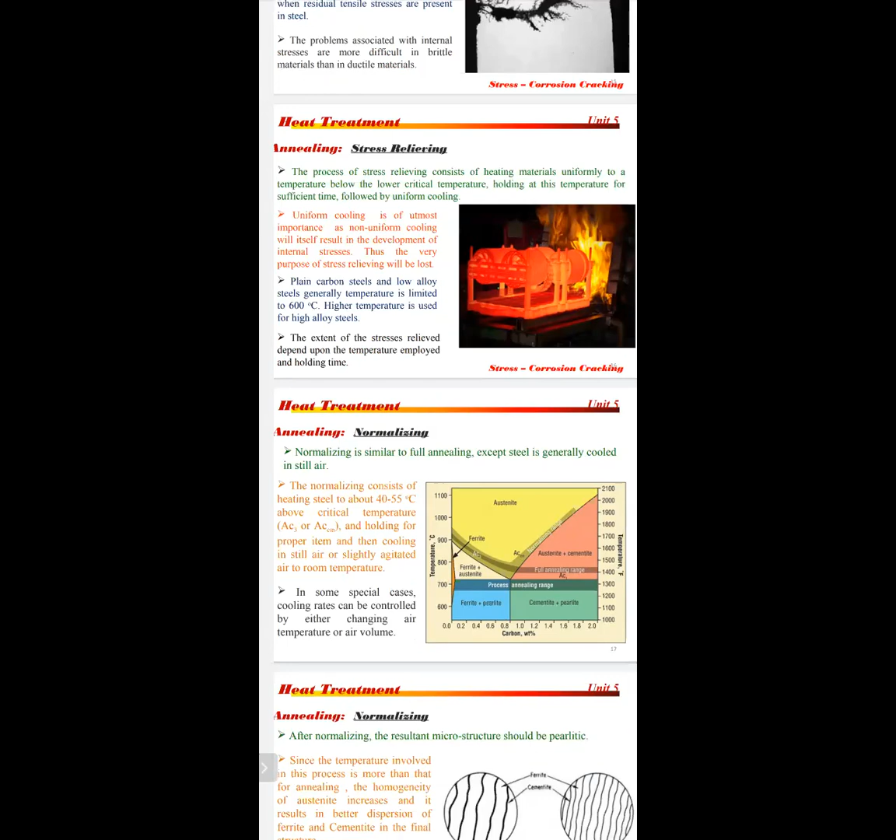For plain carbon steels and low alloy steels, the temperature is generally limited to 600 degrees centigrade. Higher temperature is used for high alloy steels. The extent of stresses relieved depends upon the temperature employed and the holding time.

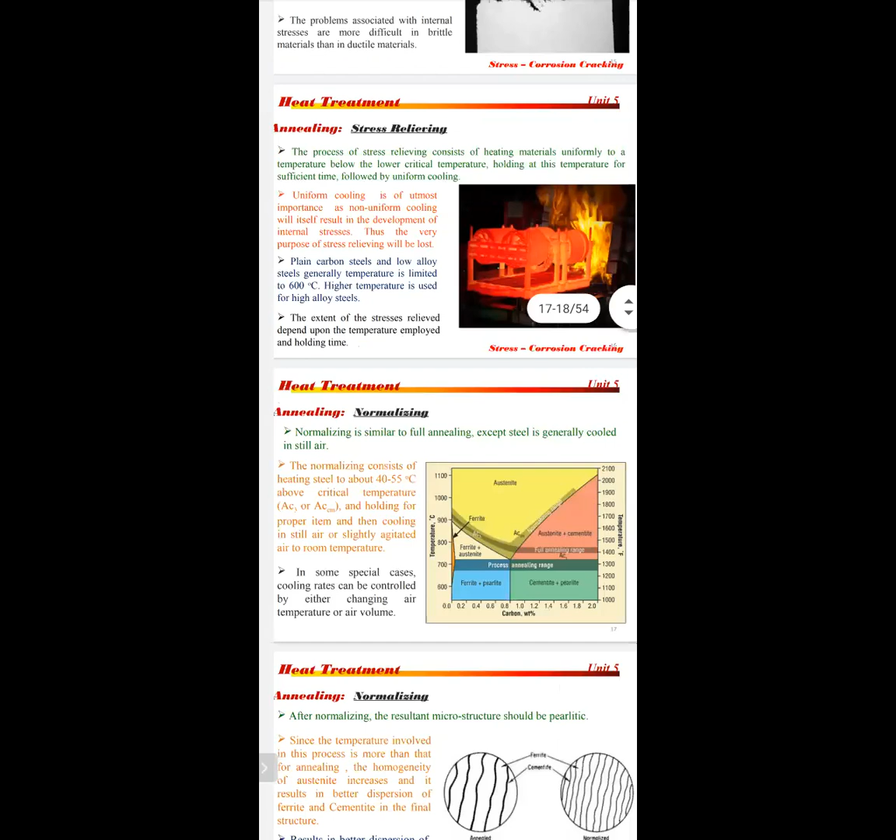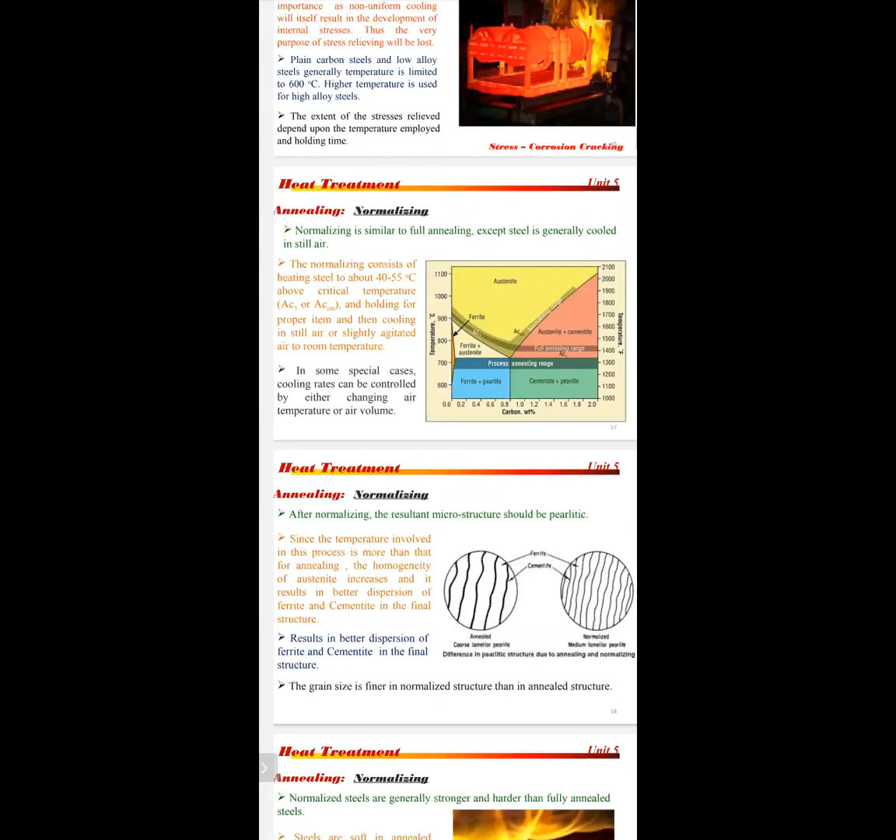These are the heat treatment annealing processes. Next, one more annealing is full annealing, which we can also call normalizing. Normalizing is similar to full annealing, except the steel is generally cooled in still air. Different cooling media are used. In annealing, the cooling is done in the furnace. Now all of you understand.

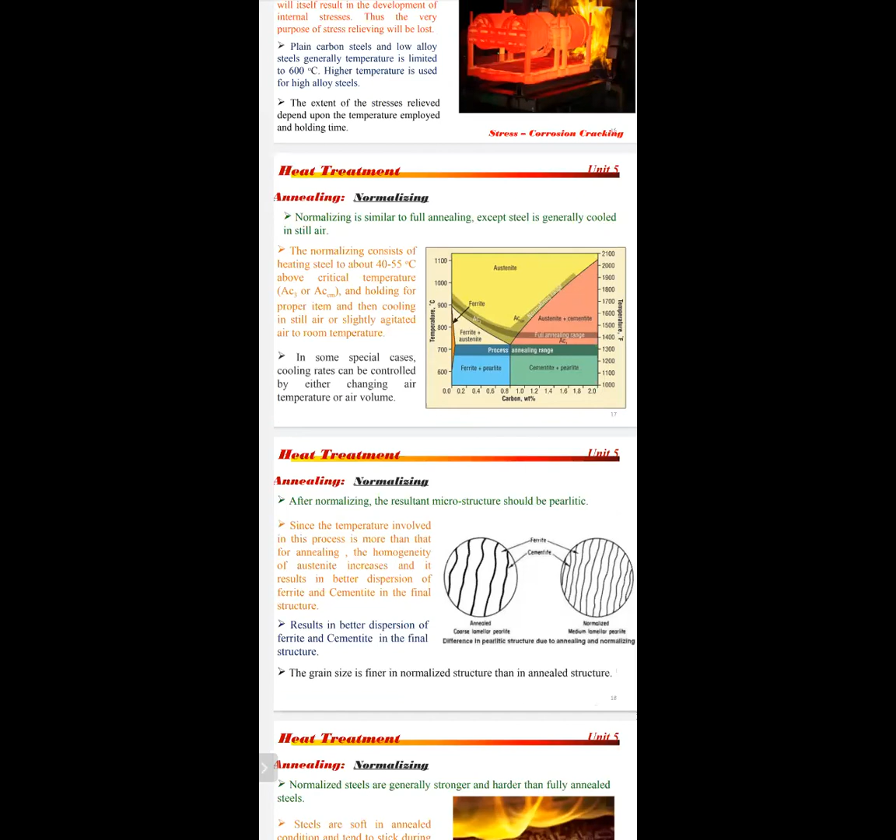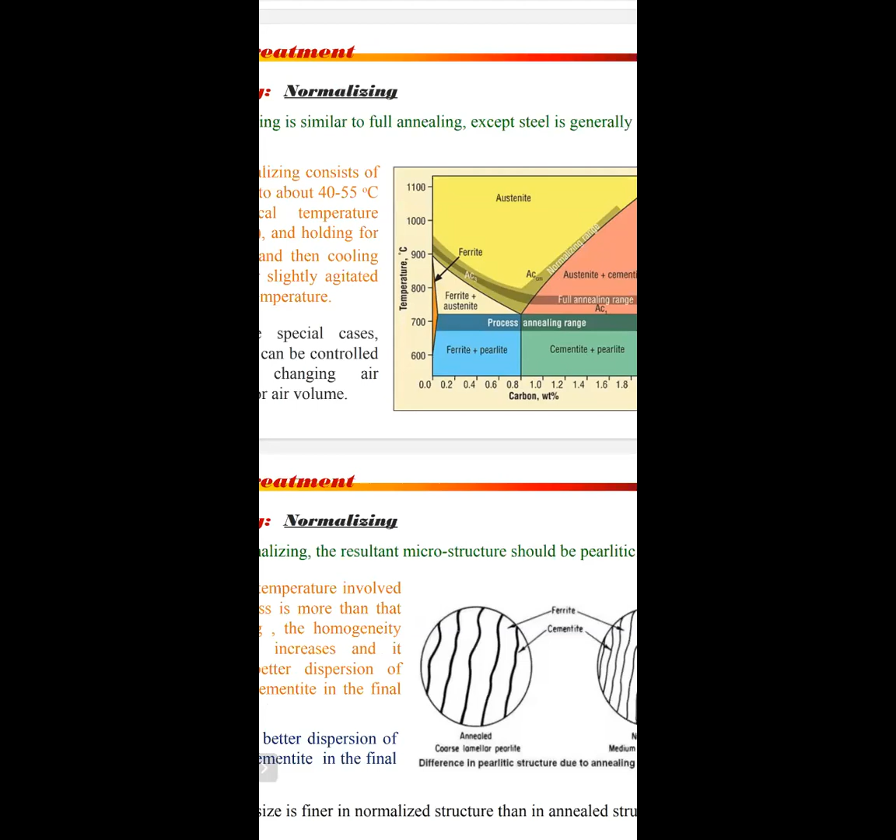The normalizing temperature for heating steel is about 40 to 55 degrees above the critical temperature, that is, above the AC3 and ACM curve. The steel is heated 40 to 55 degrees centigrade above it, held for proper time, and then cooled in still air or slightly agitated air to room temperature.

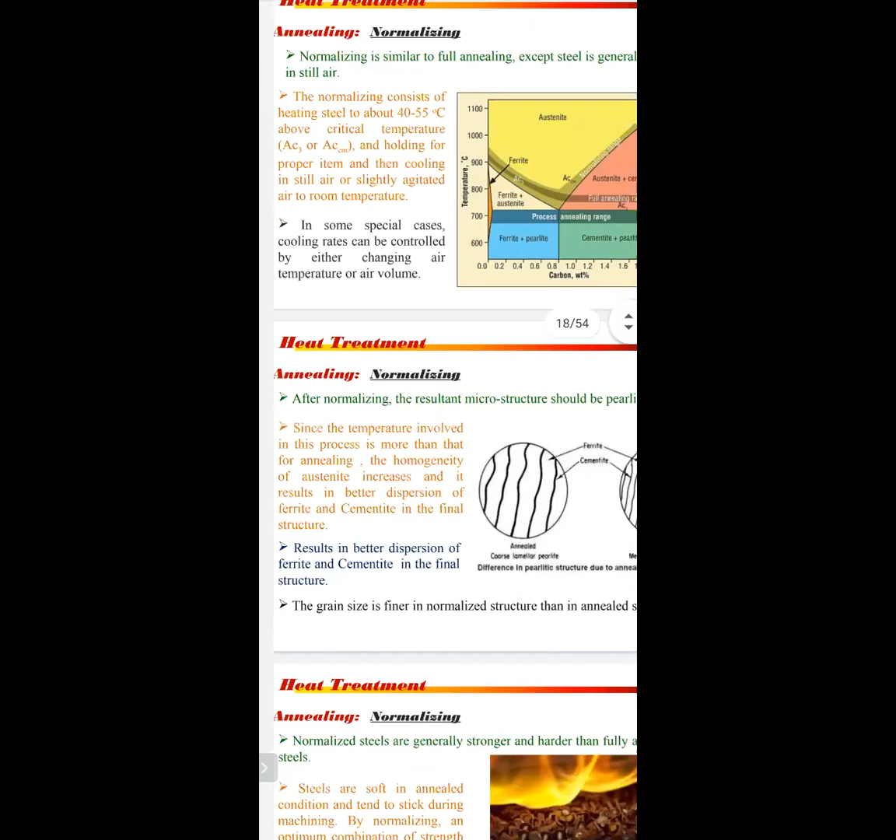In some special cases, cooling rates can be controlled by changing either air temperature or air volume. This is full annealing, or normalizing. After normalizing, the resultant microstructure should be pearlitic. Since the temperature involved in this process is more than that for annealing, the homogeneity of austenite increases and it results in better dispersion of ferrite and cementite in the final structure.

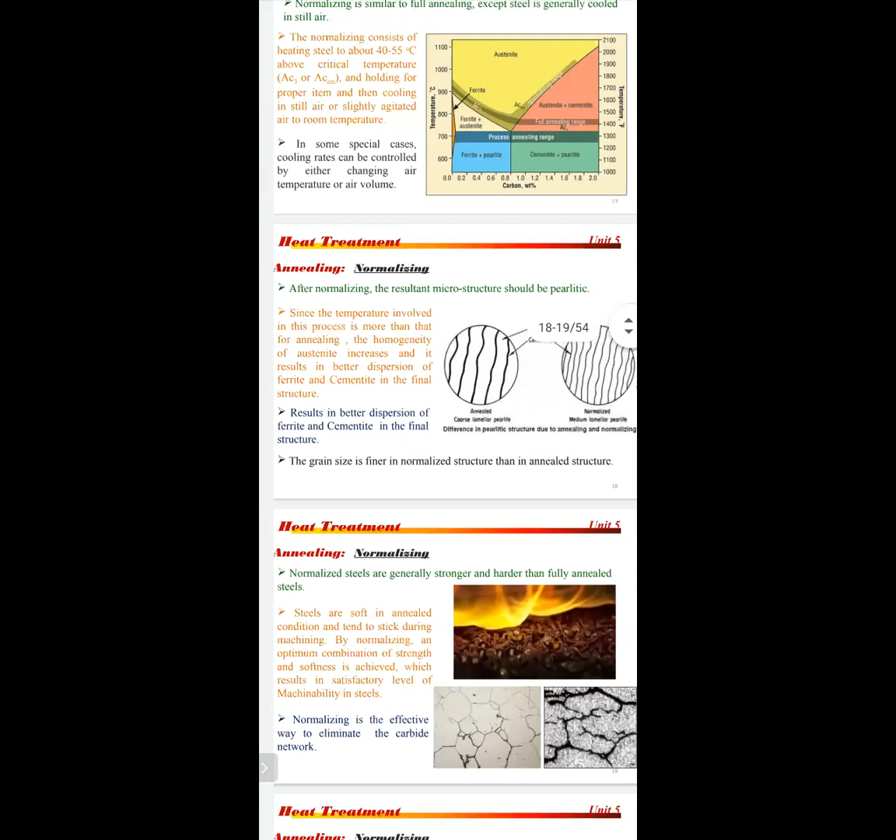That is, a fine structure will be obtained. It results in better dispersion of ferrite and cementite in the final structure. The grain size is finer in a normalized structure than in an annealed structure.

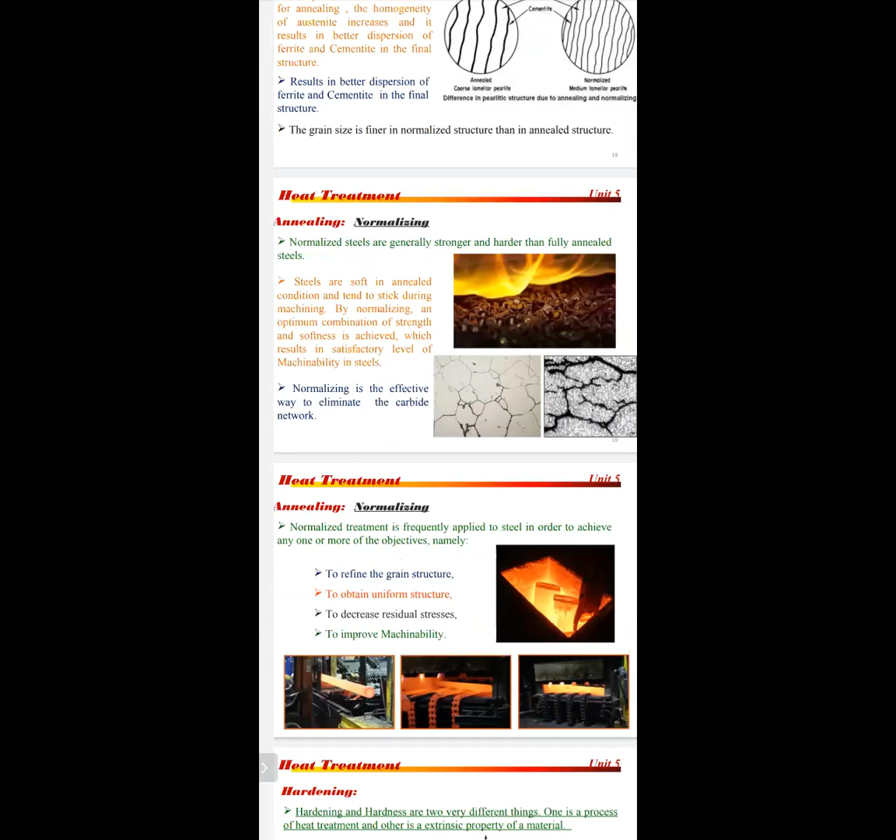Normalized steels are generally stronger and harder than annealed steels. Steels are soft in the annealed condition and tend to stick during machining. By normalizing, an optimum combination of strength and softness is achieved, which results in a satisfactory level of machinability in steel.

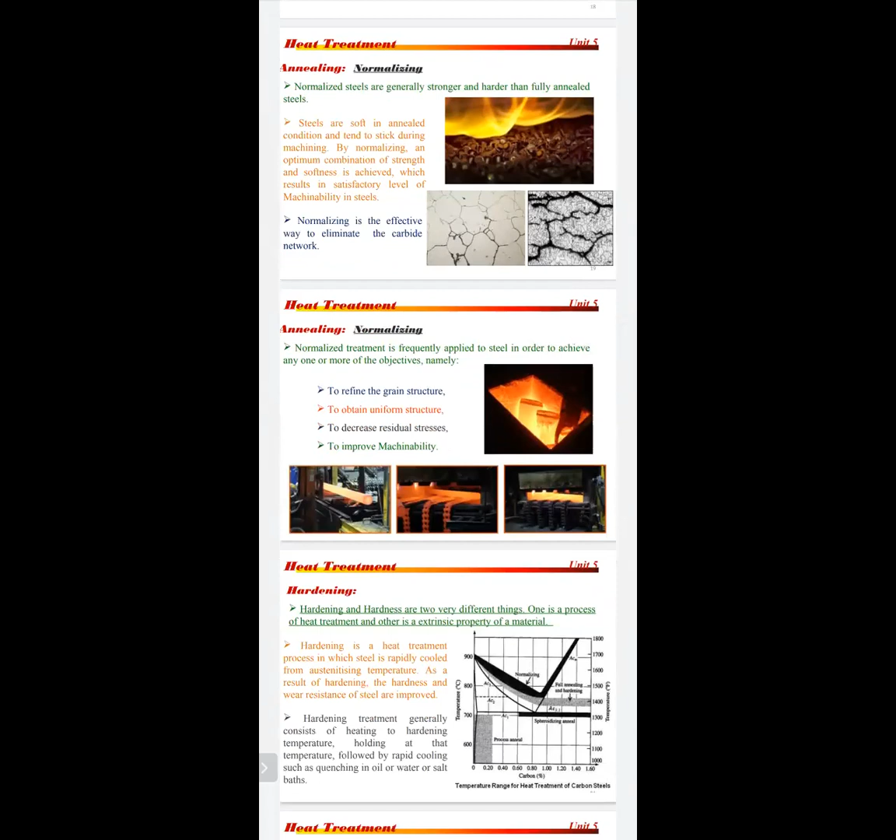Normalizing is an effective way to eliminate the carbide network. Carbide, that is cementite or iron carbide, is a very hard material. That's why normalizing is effective to eliminate the carbide structure. The normalizing treatment is frequently applied to steel to achieve one or more objectives, namely, to refine the grain structure.

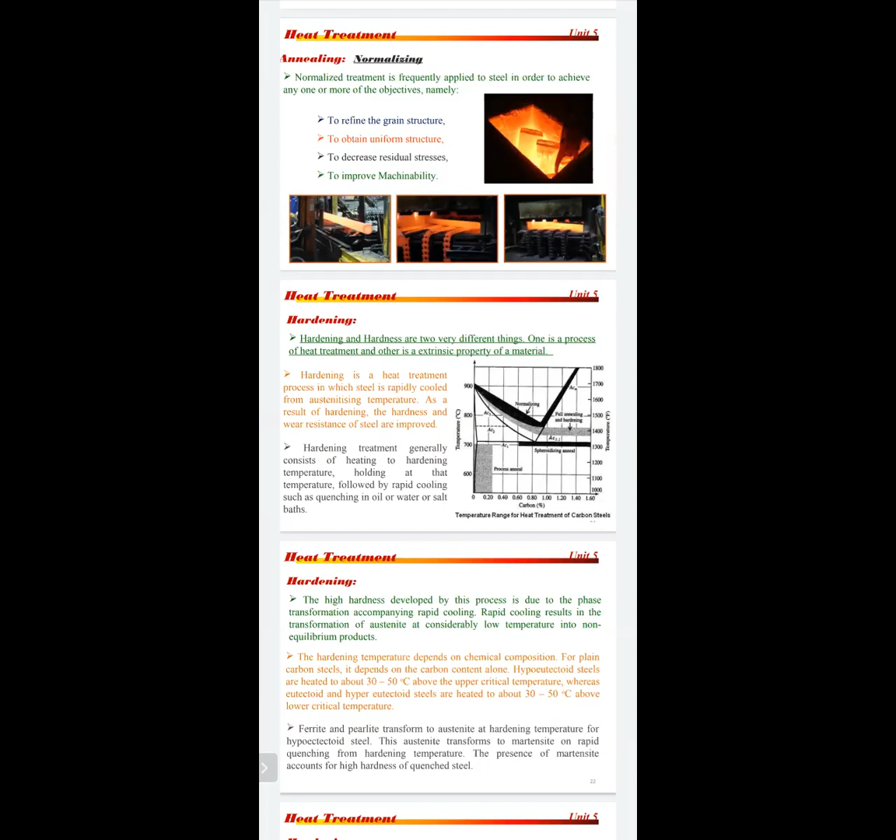Okay, first one is to refine the grain structure. Second one is to obtain uniform structure, to decrease the residual stresses, to improve machinability. So these four properties are very important in normalizing: to refine the grain structure, to obtain uniform structure, to decrease the residual stresses, and to improve the machinability.

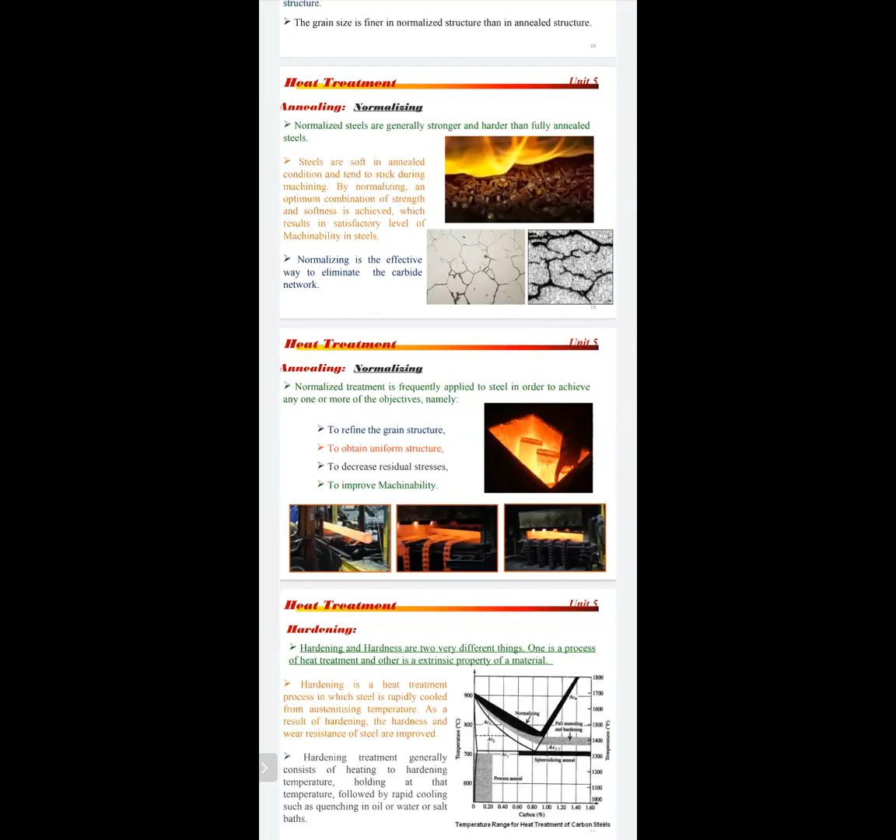Okay, I hope you are seeing the furnace heating the steel rods. Hello, Babu? Yes, sir. Seeing, sir. Is it visible? Yes, sir. Visible, sir. Are you able to understand?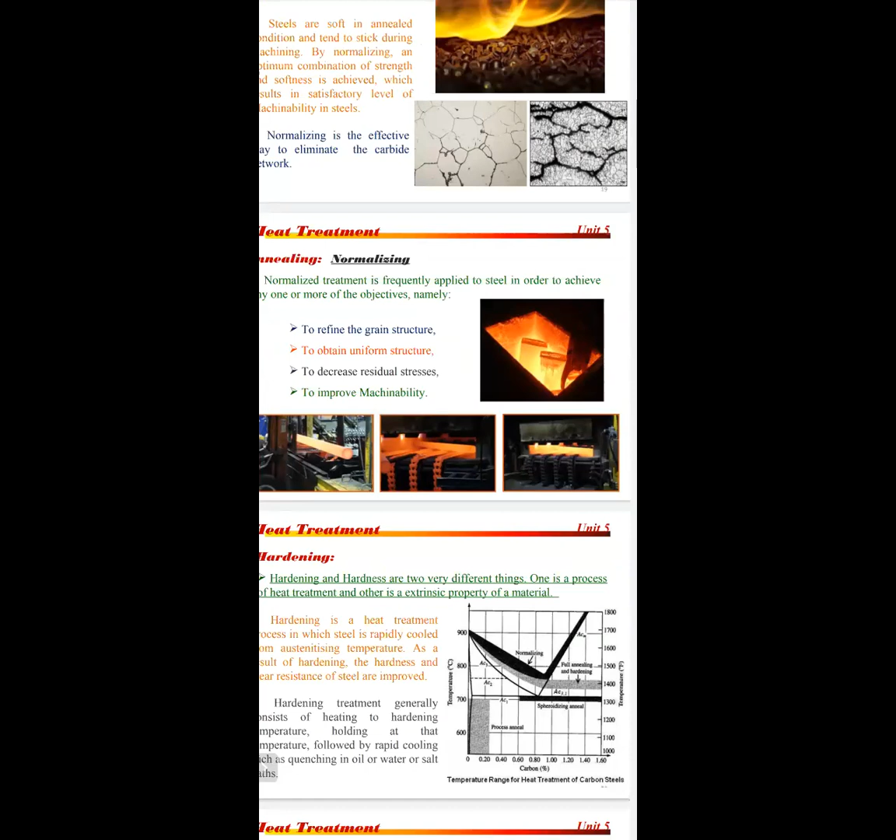First, in the furnace we will heat up to above the upper critical temperature, nearly above 1000 degrees. Then after heating, what will you do? Hold at the temperature for some time. Then we have to cool. Cooling in normalizing is done in air, to bring this material to room temperature. So many figures are here. See what they are doing. These are normalizing and annealing.

Okay, so far we have discussed. Yes, sir. Okay, sir. Do you have any doubts regarding this? No, sir.

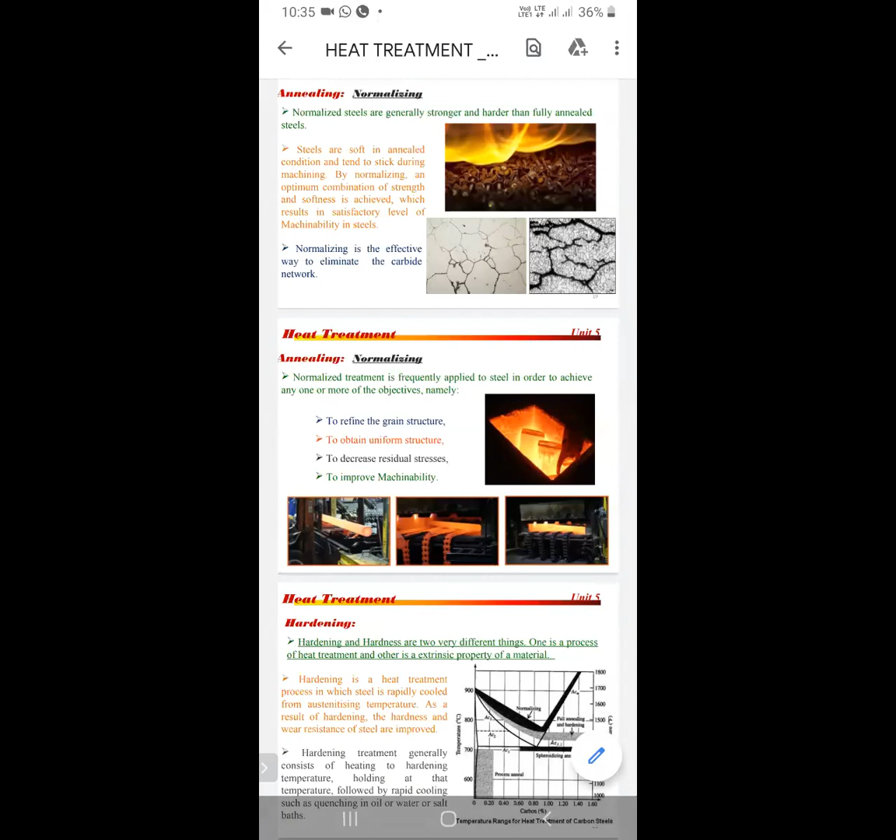Heat treatment is nothing but three steps that are very important. One is heating. Next one is soaking. Soaking means holding the material at the temperature for some time. What purpose? To change the grain structure, to refine the grain structure. Then what will you do? Then the next step is to cool that material, cooling to room temperature.

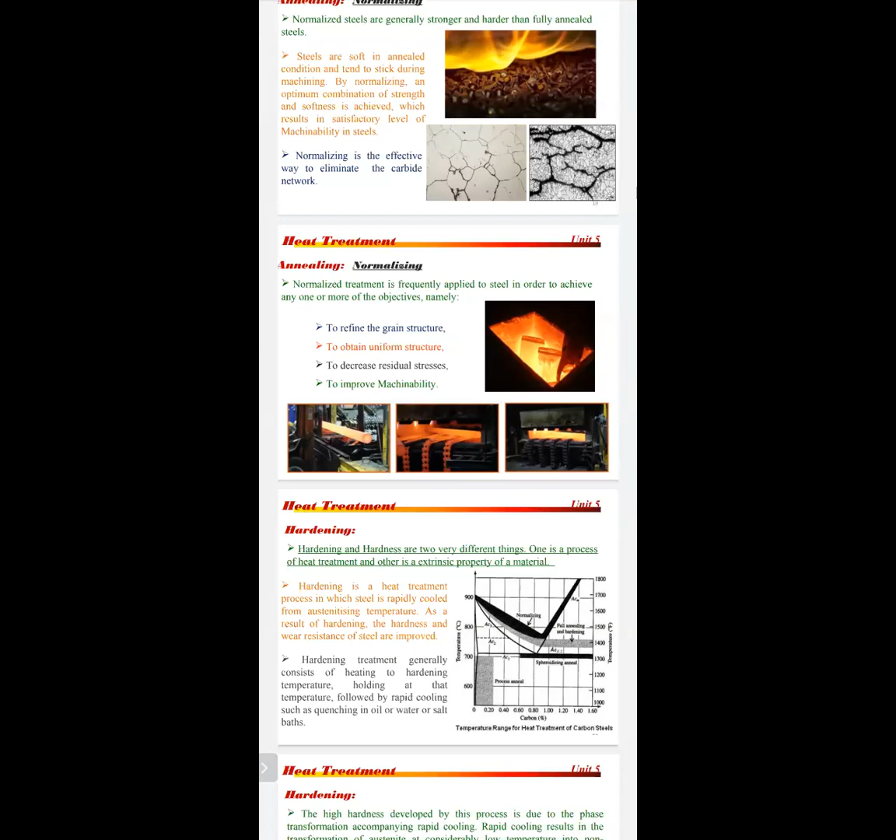Cooling media are very important in annealing. What type of cooling media will we use? That is the furnace. We have to keep that material in the furnace, where sand is there. We have to cover the material totally with sand. After some time the material gets cooled. That is the process, the cooling media. Next one is normalizing. In normalizing the cooling media is air.

In normalizing, heat the material above the upper critical. Upper critical means here one curve is there like this, above 900 degrees centigrade. Heating is up to above the upper critical temperature. Then we have to cool it in air. Simply we can put it in the air for some time. Different time periods are there for cooling. That is the cooling process. Have you understood this one?

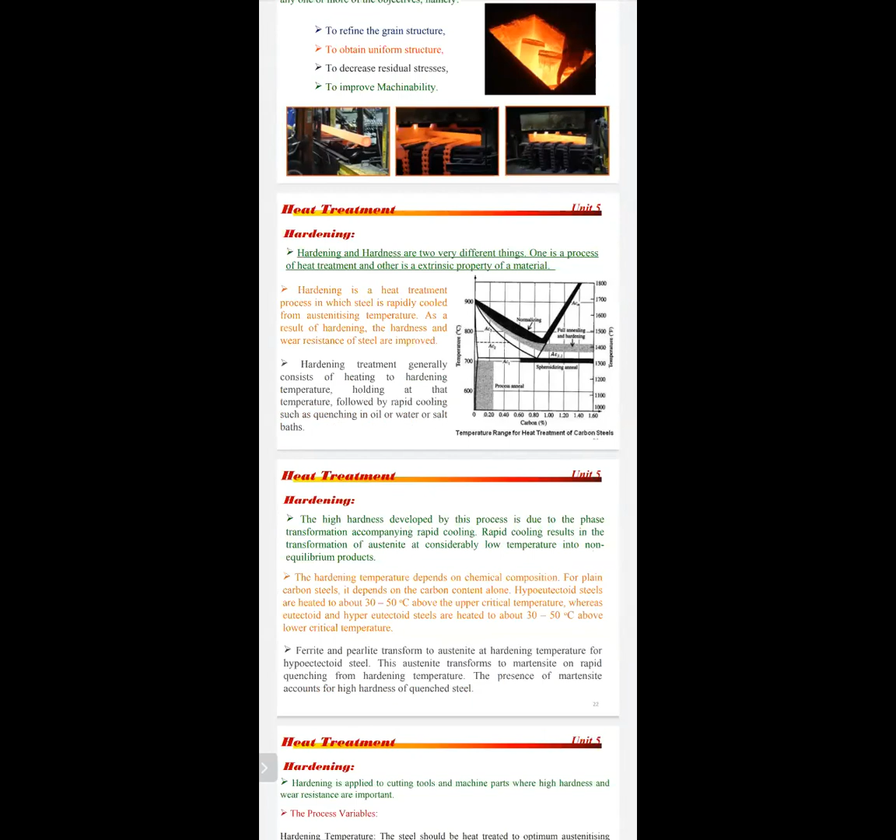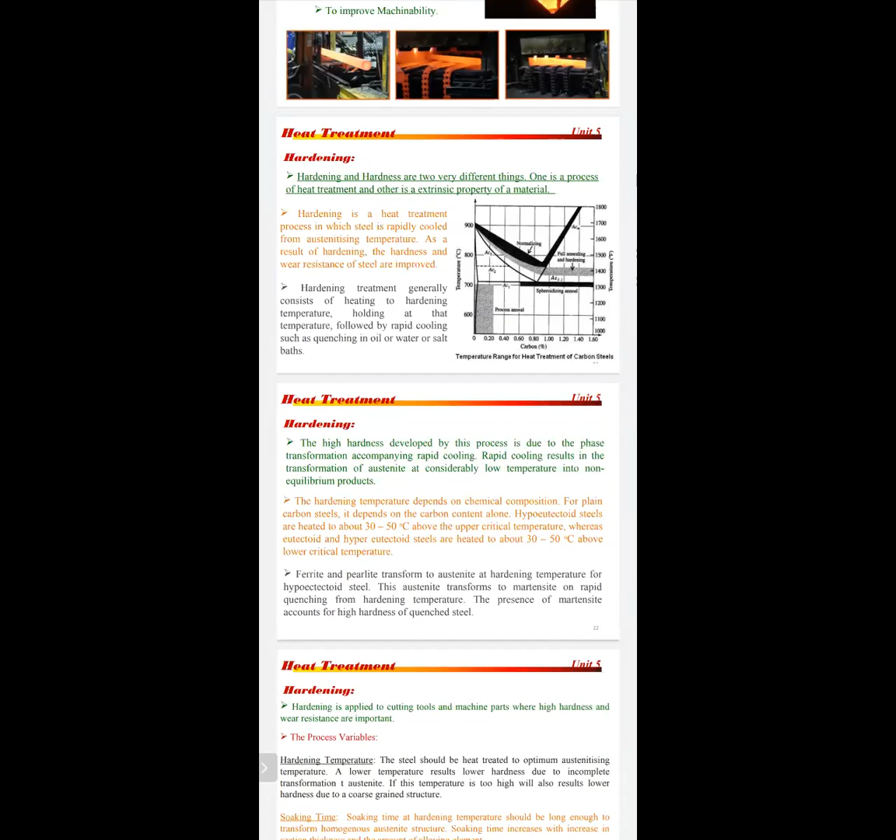See, hardening and hardness are two very different things. One is a process of heat treatment, another is a property of a material, hardness. This one is the property, one is the process. Have you understood this point? Hardening and hardness, are both the same or different? Different, sir. Hardening is the treatment, the other is the property. One is the property of the material, one is the process.

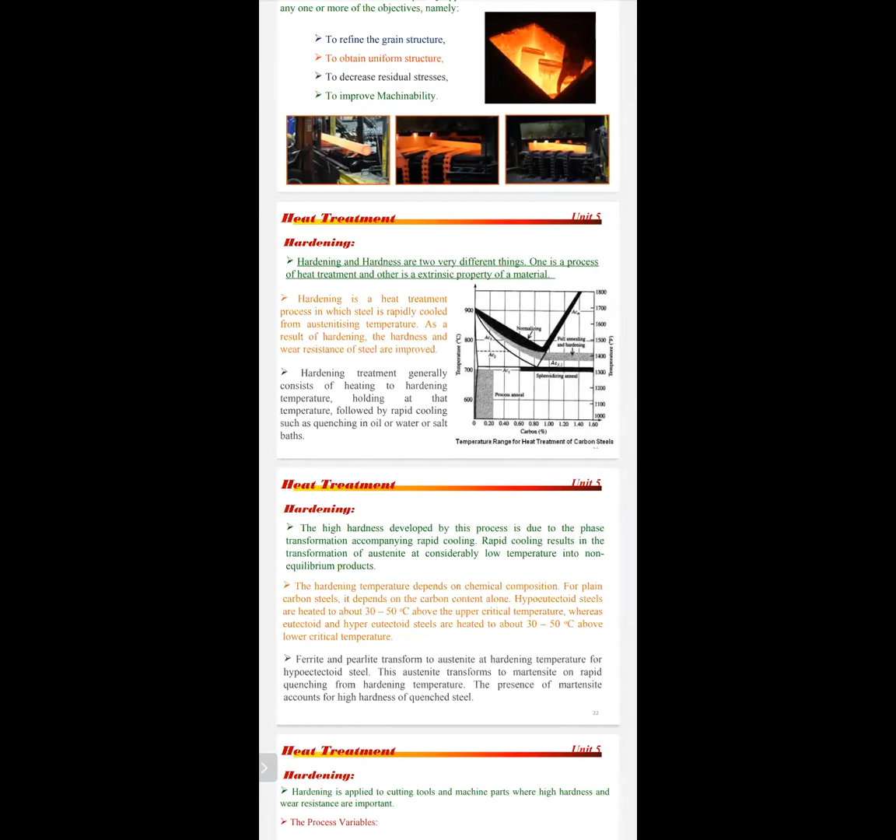See here, hardening is a heat treatment process in which steel is rapidly cooled from the austenitizing temperature. As a result of hardening, the hardness and wear resistance of steels are improved. Why I'm emphasizing hardening is, we have to heat the material above some temperature. See here the temperature as mentioned. Hardening temperature depends on the chemical composition. For hardening of carbon steel, it depends upon carbon content alone.

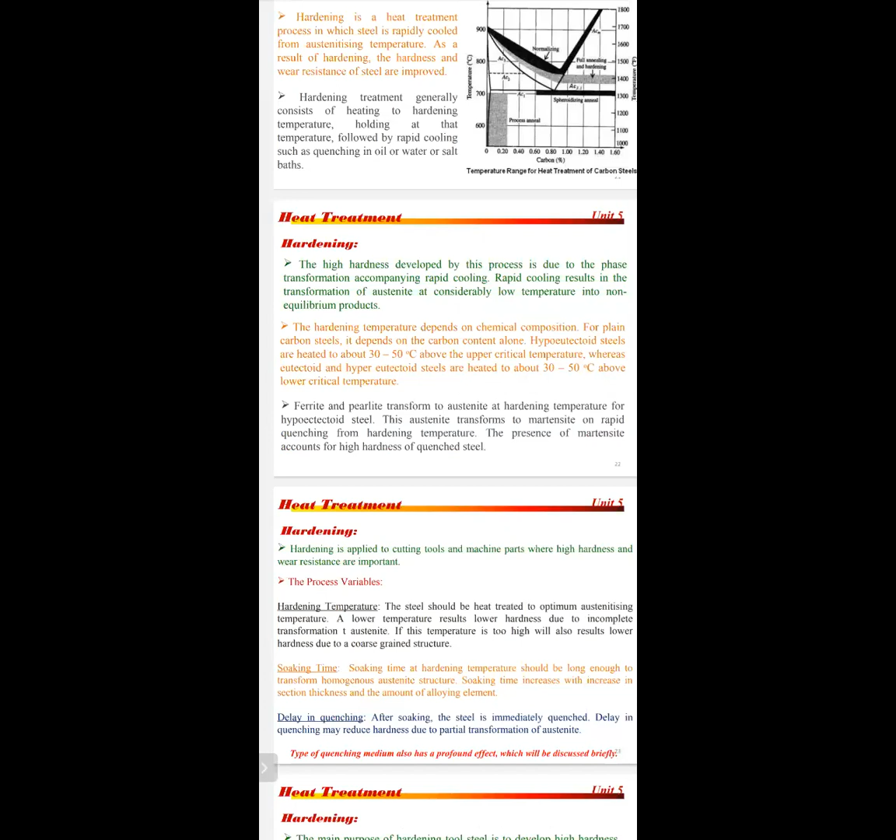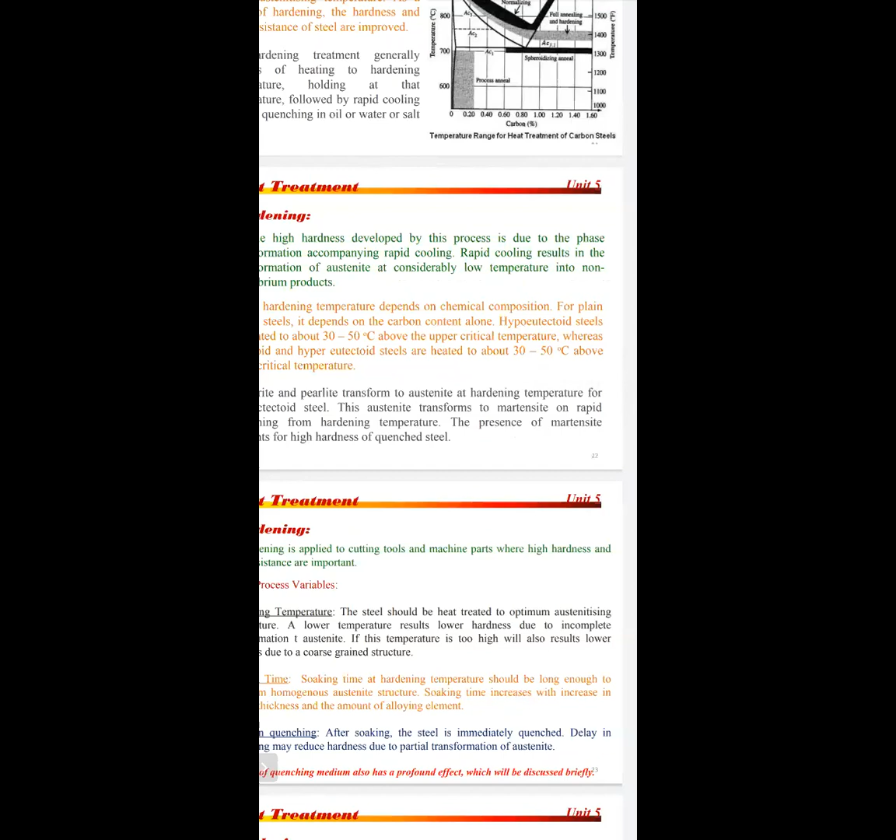Hypoeutectoid steels are heated to about 30 to 50 degrees above the upper critical temperature, whereas the eutectoid and hypereutectoid steels are heated 30 to 50 degrees above the lower critical temperature. That is, for heating, the temperature limits are mentioned here: 30 to 50 above upper critical for hypoeutectoid, and for hypereutectoid above the lower critical temperature.

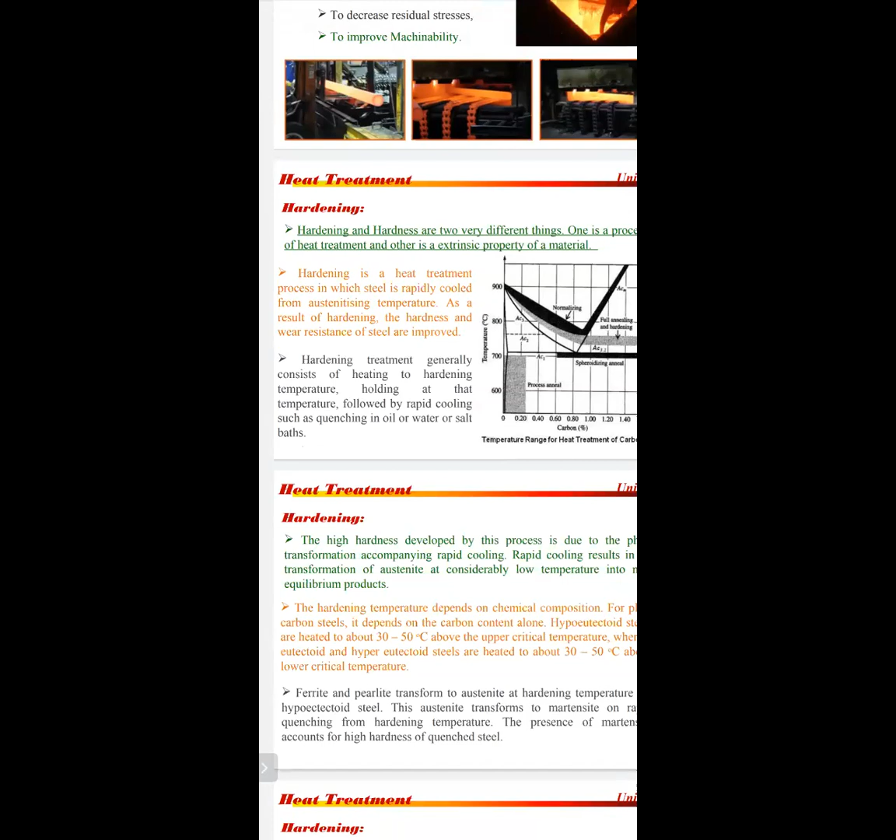Okay, after completing this one, then what will you do? Here in a hardening process, the cooling is rapid cooling. Can you tell which one is the rapid cooling media? Air is one cooling media. Next one is the sand furnace, that is one more cooling media. Next one is water, or oil, or salt bath. Which are the fast cooling media? Tell me.

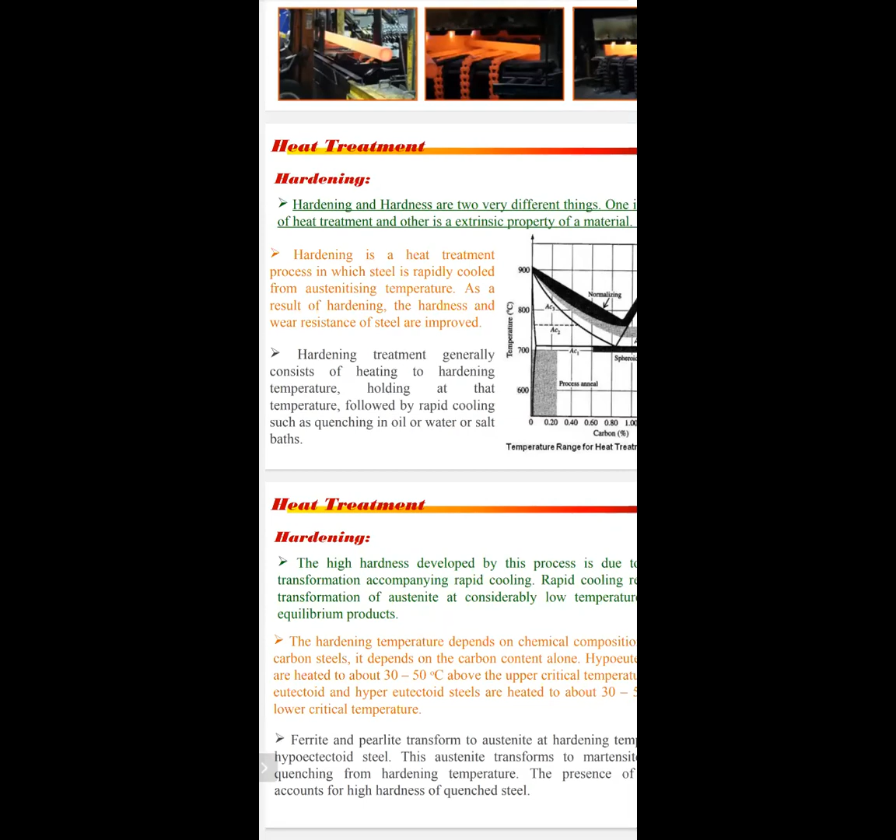Hardening is a heat treatment process in which steel is rapidly cooled from austenitising temperature. As the result of hardening, the hardness and the wear resistance of the steels are improved. Hardening treatment generally consists of heating to hardening temperature, holding at the temperature, followed by rapid cooling, such as quenching in oil or water or salt baths. After heating and holding at the temperature for some time, rapid cooling means we have to dip the total material in the water.

If you immerse the material into the water, what will happen? Immediately, it will be cooled. Is it right? Yes, sir. Water is the fastest cooling media compared to air cooling and sand cooling. Okay, sir. So in the hardening process, the cooling media is water. All of you understand.

If you immediately dip it in the water, it is immediately cooled, so the material will be hardened immediately. Within no time it will be cooled; that's why the material gets hardened. If there is time, like in normalizing and annealing, the material will get ductility and softness. But here there is not that much time to cool the material. Quenching in oil or water immediately, some different property will be changed. That is, it gets hardened. Okay, sir.